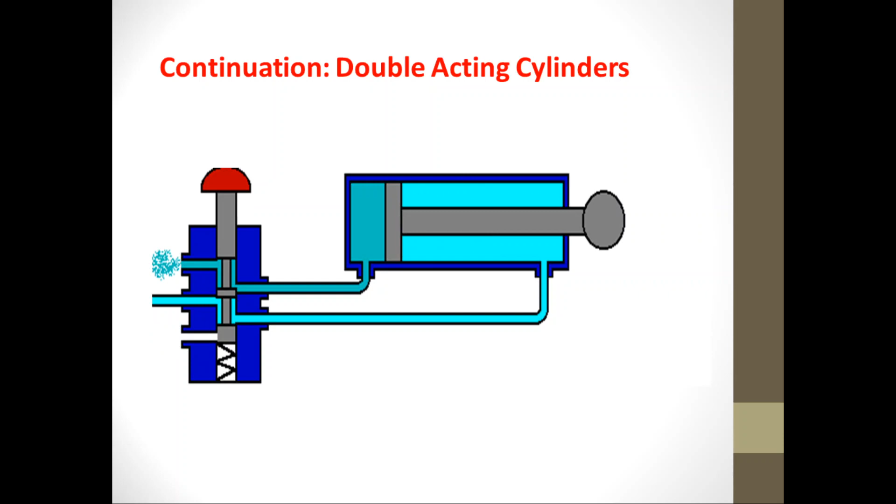Okay, so now for the double acting cylinders, this type of cylinder must be paired with what we so called five two-way solenoid valve. Five two-way solenoid valves are used to control the position of a double acting cylinder.

Take note, for single acting cylinder, it must be 3/2-way, sometimes read as 3-2-way. For the double acting cylinder, it must be paired with a 5 two-way solenoid valve. The number 5 indicates the number of ports, and 2 represents the number of positions the cylinder can attain. These positions are the extended position and the retracted position.

Now there are two types of 5 two-way solenoid valve. The first one is the single coil, or spring return, 5 two-way solenoid valve.

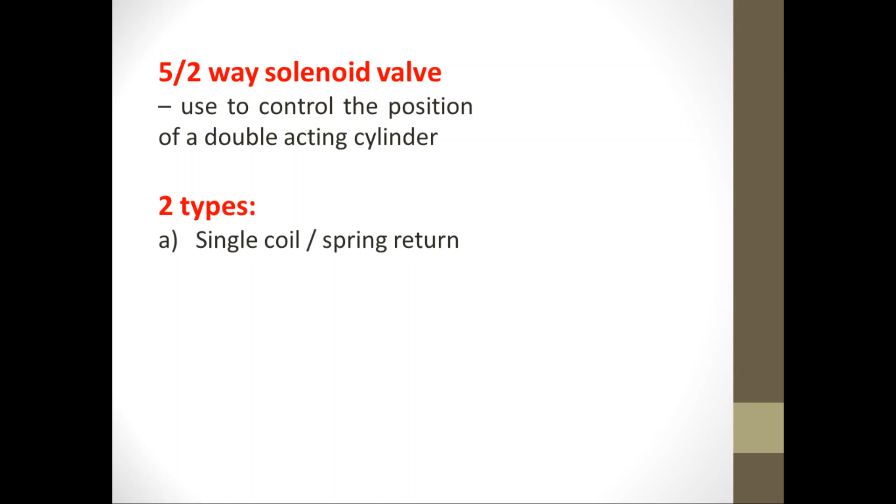This would be a typical actual example of the single coil 5 two-way solenoid valve. If you imagine the 3 two-way solenoid valve, it looks the same as the 5 two-way, except there are two service ports. If you look, there are two service ports here, and then you have one solenoid coil. That is why we term this one single coil, or spring return, 5 two-way solenoid valve.

The second type of 5 two-way solenoid valve is the double coil. As you can see, the difference between the two types is the number of coils. The first type is the single coil, so from the name itself there is only one coil. This is the part of the solenoid wherein we supply the voltage or electricity. Once the coil is supplied, it will activate the passage of air. Similarly, in the double coil 5 two-way solenoid valve, each coil must be activated for the air to be allowed to flow.

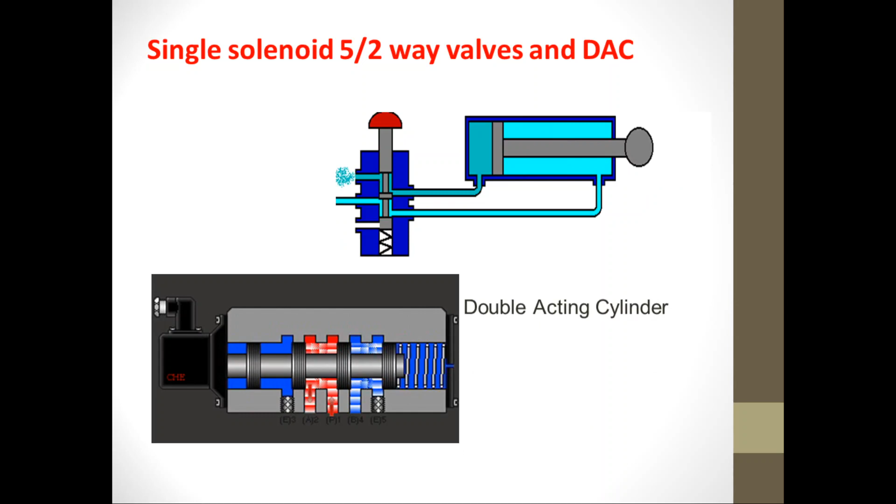So the next type of 5-way solenoid valve is the double coil. Before we go through the double coil, for the single solenoid, basically the operation of the solenoid is the movement of the plunger. The movement of the plunger actually dictates the direction of the airflow, coming from the compressor going to the pneumatic cylinders. So sometimes the solenoid valves are termed directional valves, since they dictate the direction of the pneumatic cylinders.

So single solenoid means that the way for the plunger to move back to its initial position is by means of a spring. Once the source is deactivated, the spring will push the plunger of the solenoid valve so that it is placed back in its original position.

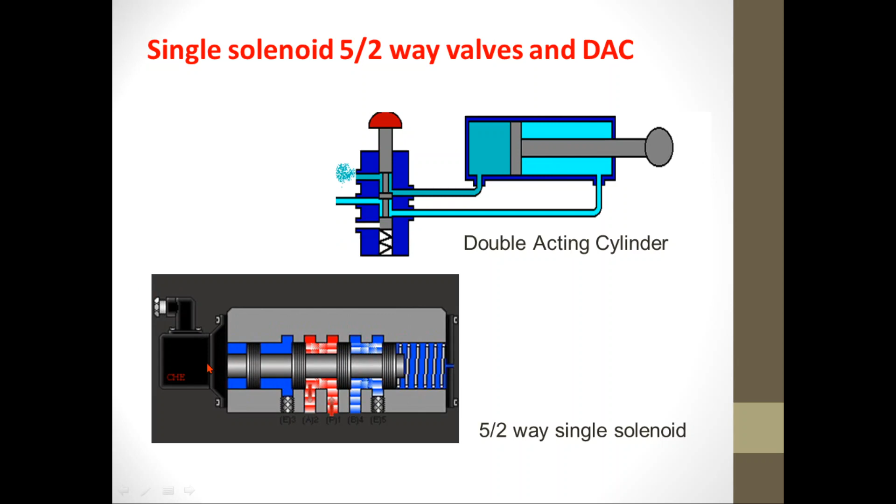For the single solenoid, if you want the cylinder to extend, you simply turn on or energize the coil of the solenoid valve. Once you energize this one, the double acting cylinder will extend. But if you turn off the solenoid coil, then the cylinder will retract.

Now for the double solenoid, to extend the double acting cylinder using a double coil 5-way solenoid valve, first you need to turn on the first coil, so the cylinder will extend.

Even if you turn this one off, take note, the double acting cylinder will not retract. Because the plunger does not return to its original position, the flow of air will still be in this direction, the red one. So to retract the double acting cylinder, you need to turn off this coil.

At the same time, you need to turn on the second coil. In the single solenoid, you just simply turn off the coil, and it is the spring that will push the plunger back to its original position.

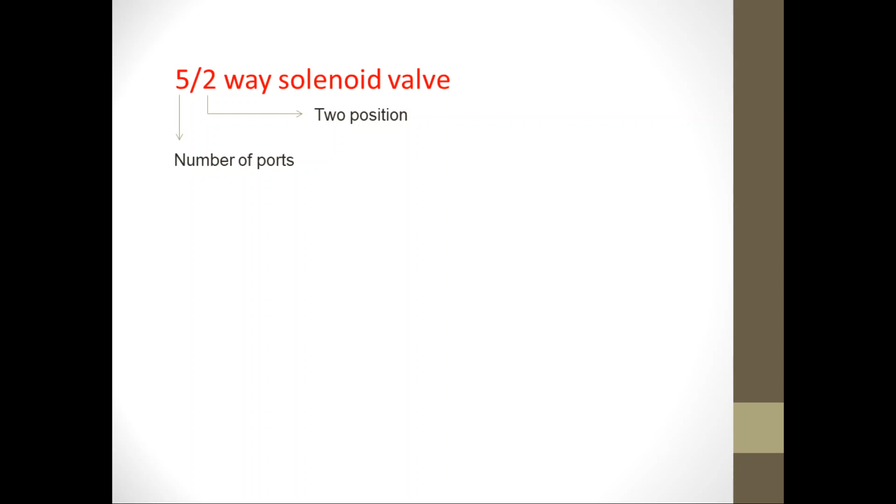So before we continue to the next topic, let's take a look at the configuration of the 5-way solenoid valve. The 5 represents the number of ports. The 2 represents the two positions that the 5-way valve can offer, either extended or retracted position. This would be the schematic diagram of the 5-way solenoid valve.

The first one is single coil, and the second one is double coil. For the single coil, you have one solenoid coil. For double solenoid, there are two solenoids.

You supply this one, then the cylinder will extend. You cut off or turn off the supply, then the cylinder will retract. In this case, you turn on this coil, the cylinder will extend, and then you turn on this second coil, and the cylinder will retract.

Now the fourth one, numbered 1 represents the inlet port. This is the port in the solenoid valves wherein you inject the air pressure coming from the compressor, and then ports 3 and 5 represent the exhaust port.

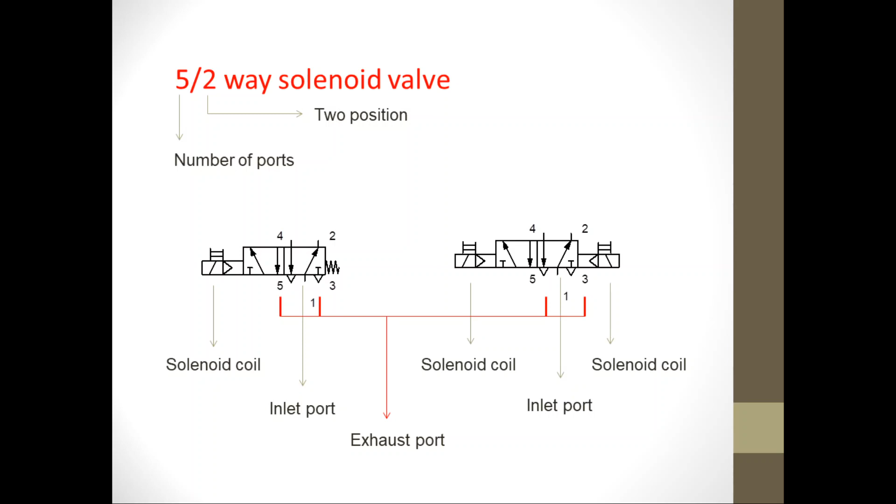Okay, so this would be the port wherein the air coming from the other side of the double acting cylinder will be exhausted. Okay, so ports 4 and 2 are the service ports. So this is where the double acting cylinder will be connected.

Port 4 is the exit point of air coming from the solenoid valve to push the double acting cylinder into its extended position. Port 2 is the exit point of the 5-way solenoid valve for the double acting cylinder to return to its retracted position.

Okay, so as you can see, there are 5 ports: one inlet, 2 service ports, and 2 exhaust ports. For the 3/2-way valve, if you remember, 3 represents the number of ports: one inlet, one service, and one exhaust.

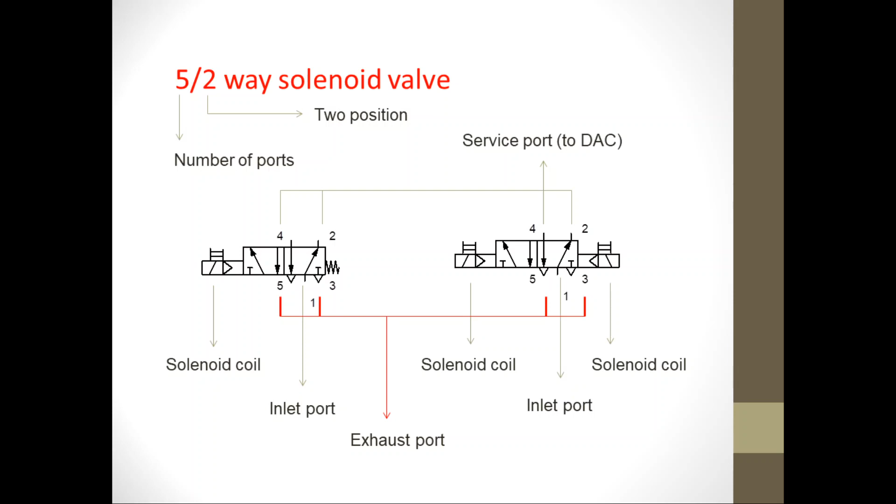Okay, so now the next topic would be the proximity sensors. So how important are the proximity sensors? The proximity sensors are employed in an electropneumatic system, and they detect the position of the cylinder, whether it is in extended or retracted position.

Okay, so take note, one cannot know whether the cylinder is in extended or retracted position, particularly if the cylinder cannot be seen by direct visual observation, wherein the naked eye of the operator cannot see directly the position of the cylinders, whether single acting or double acting.

So we'll be using 2 types of proximity sensors. The first one is the reed switch. The reed switch is an electrical switch, and its application is done through the use of magnetism. The second type of proximity sensor is the limit switch. Limit switches may change contact only if they detect the mechanical presence of the pneumatic cylinders.

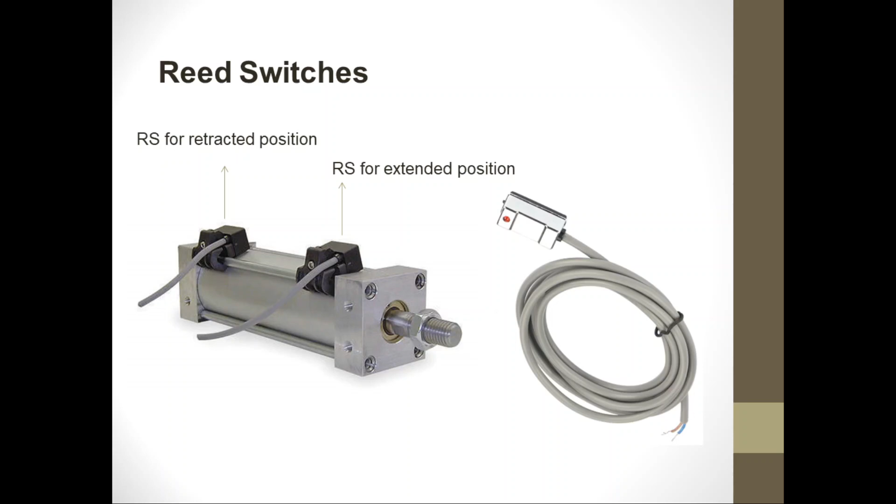so before we continue, this would be the positioning of the proximity sensors. Okay, so the limit switch must be installed outside the pneumatic cylinder, wherein you have to see to it that the limit switch can be hit. When the cylinder extends, it will create a mechanical contact with limit switch 1, and when it is in retracted position, it will create a mechanical contact with LS2.

So the proximity sensor or the reed switch must be installed in the body, wherein the base of the piston rod must be of magnetic material. For the limit switch, the base of the piston rod may not be of magnetic material. For the reed switch, the base of the piston rod must be of magnetic material because it will be detected by the reed switch.

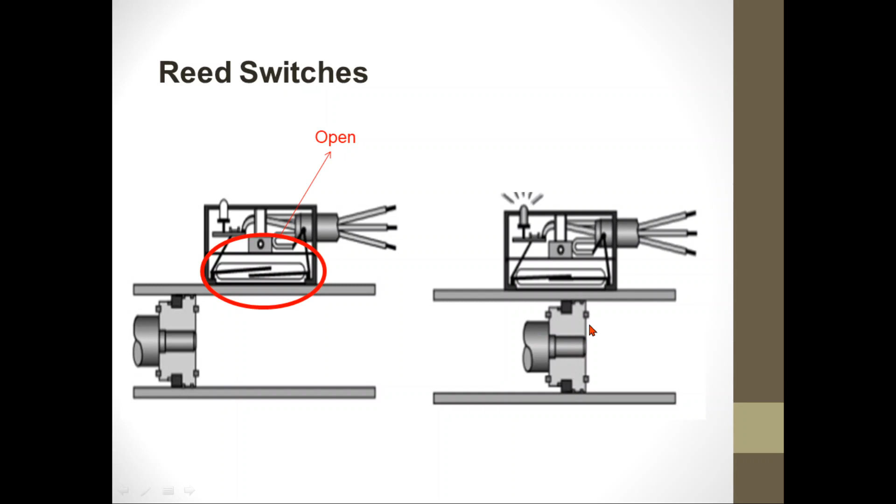Okay, so now if you look at this point, the reed switch is actually open. But when the base of the piston rod is under the reed switch, since it has a magnet, the black one, it will pull this contact, thereby creating a closed contact in the switch.

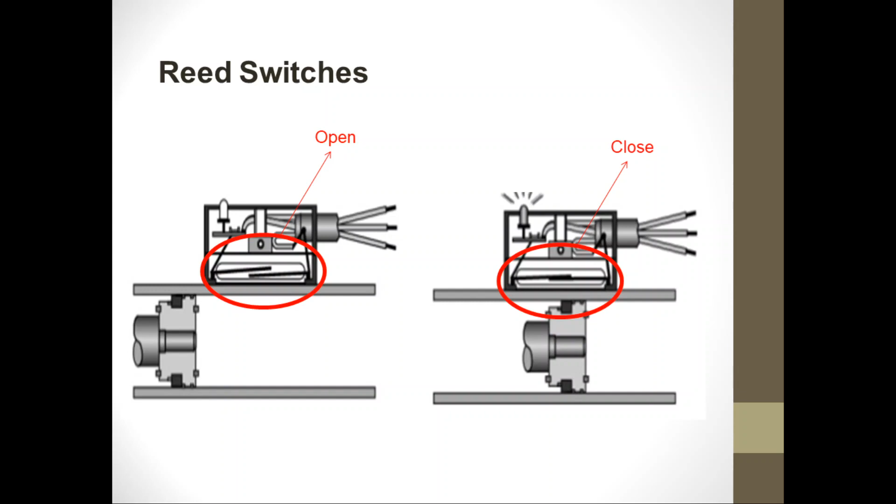To better understand the topic, let's go to the simulation software, and then we'll try an example for the double acting cylinders together with the 5-way solenoid valves. Assuming that you have already downloaded the software, you can go to the downloaded software.

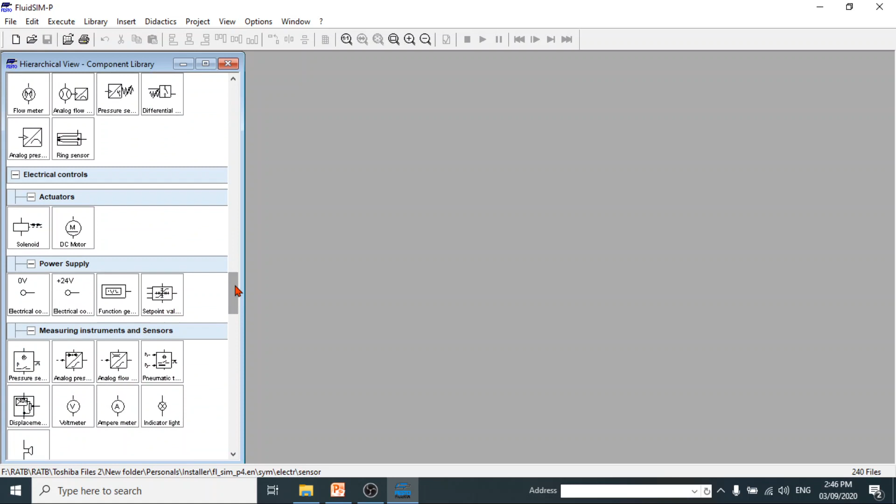Okay, assuming that you have already extracted the FluidSIM software, again, to run it, you open the folder, go to bin, and double click the application icon. Okay, and then you'll be directed to this new window. Again, these are the component libraries that may be of use for electropneumatic simulation. Again, not all of these components will be used.

Okay, so we'll just pick some that may be useful, particularly in the simulation of our laboratory exercises. So to begin with, we can click this icon to create a new working environment or working area. You'll be given this new tab. Let's close the other one. So this will be the working area.

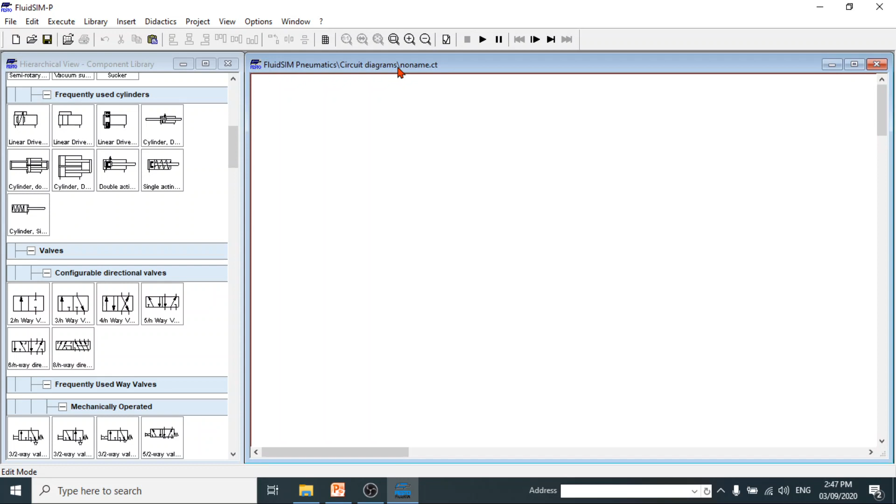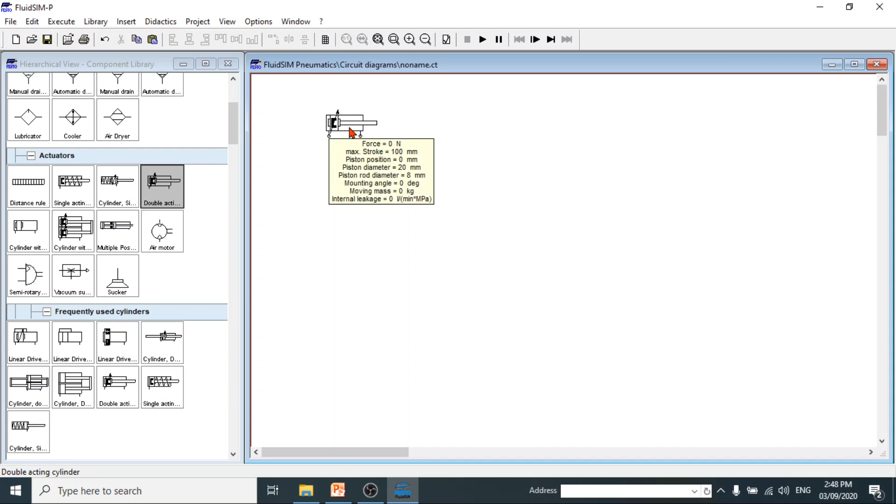Now to illustrate again the principle of a double acting cylinder, we first pick in the actuator side. You click double acting cylinder, and then drag it to the working area. Then first we need to find the appropriate solenoid valve for the double acting cylinder. So we have here the 5-way solenoid valve. This is for the single solenoid or single coil.

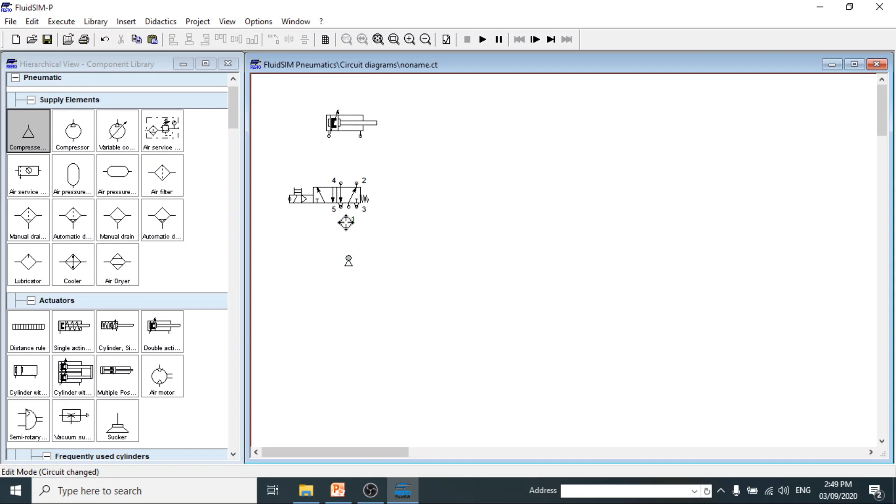And then the compressor, which can be found in the supply elements. So click and then drag. The compressor will be connected to the inlet port, which is port number 1. The service ports will be connected to the double acting cylinder. So just click 2 to this point and 4 to this point. So this is now the pneumatic circuit using the double acting cylinder.

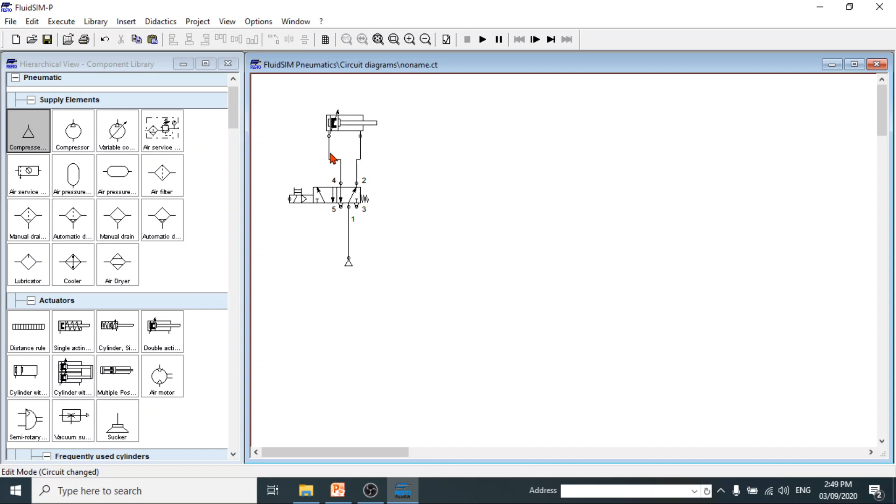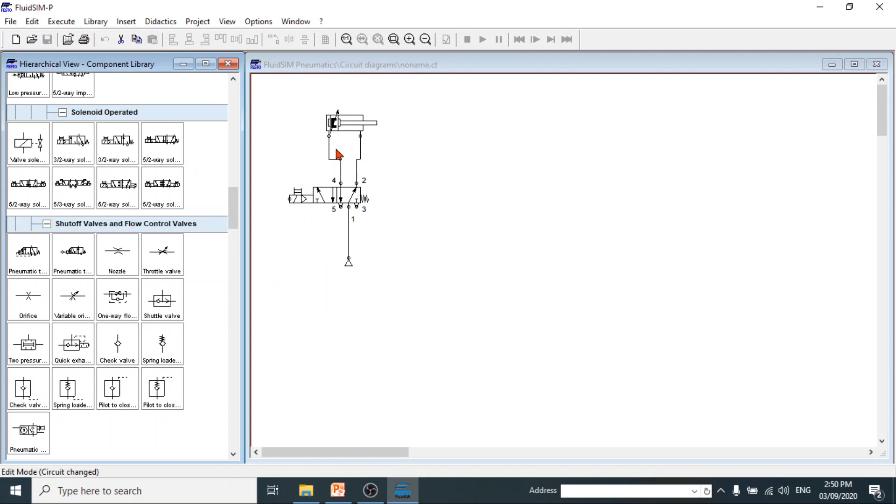By the way, we can add in the shut off valves and flow control valves. So we can add the throttle valve. This is used to adjust the airflow, the flow rate of the air coming from the compressor going to the pneumatic cylinder. So again, click, and then you click this one, and you can rotate it by 90 degrees.

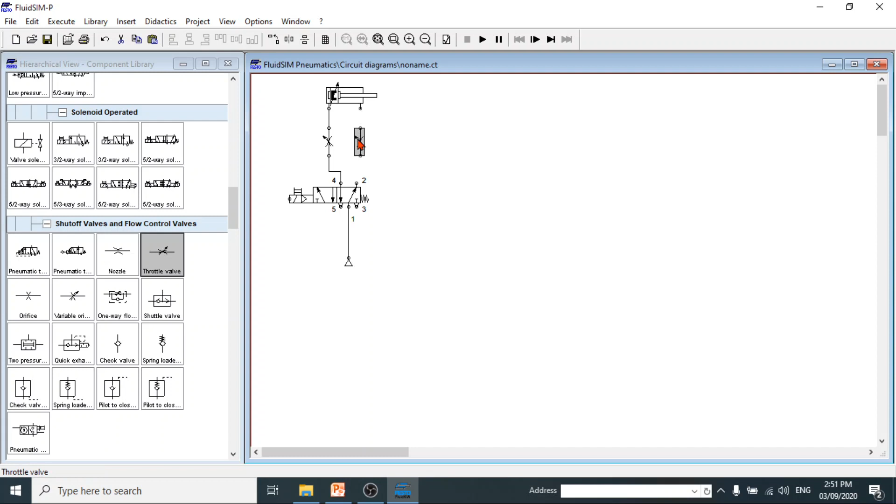You can insert it in between the valve and the cylinder. So you click this line, delete, and then insert. Then you can copy: just press Ctrl C, then Ctrl V, and you will have the flow control valve. Again, the purpose of the flow control valve is to adjust the flow rate of the incoming air from the solenoid valve going to the cylinder.

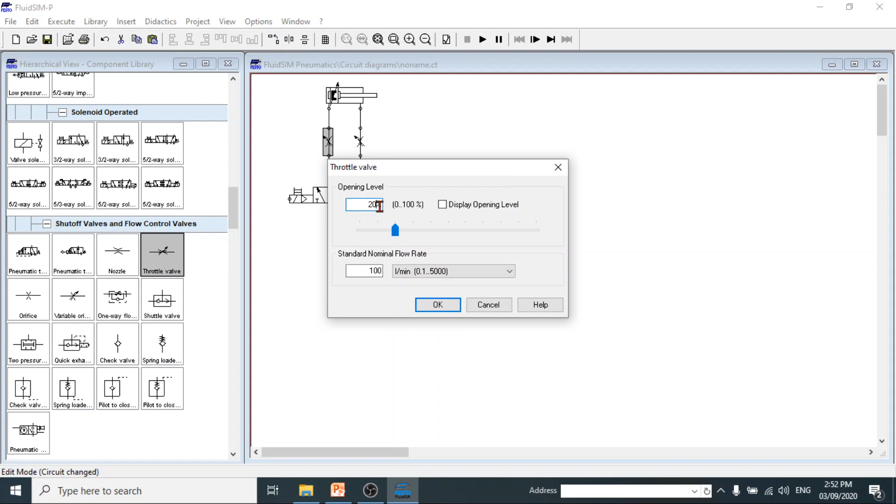To adjust it, you can double click, and then you can adjust the opening in terms of percentage, like 50%, 10%, or 20%. 100% means that the valve is fully open. You can imagine the throttle valve as similar to a faucet. When you open the knob, the outgoing flow of water will be very high. You adjust the opening of the faucet by turning the knob. Similarly in the throttle valve, you can adjust the opening to regulate the flow of air.

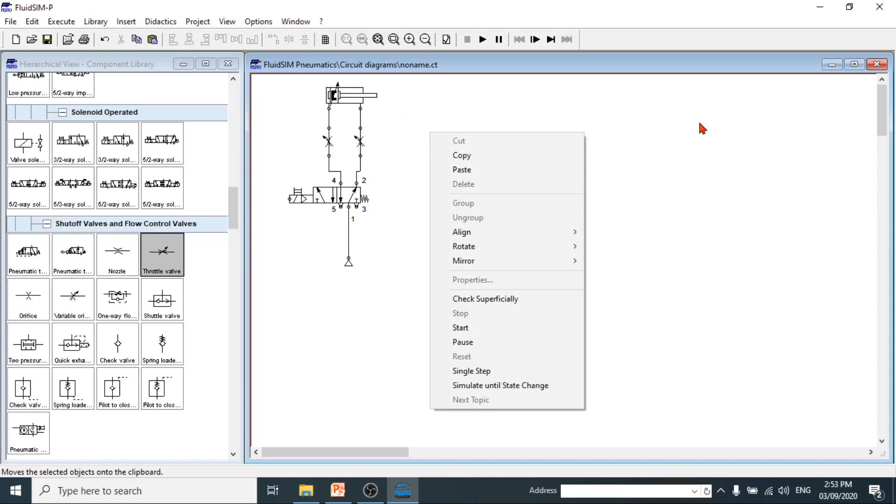As mentioned in the lecture from the previous slides, the main advantage of the double acting cylinder compared to the single acting cylinder is that in a single acting cylinder you can only adjust one speed of the cylinder, because you cannot adjust the speed the other way since it is mandated by the spring. In the double acting cylinder, you can adjust the airflow to increase or decrease the extension and retraction speed.

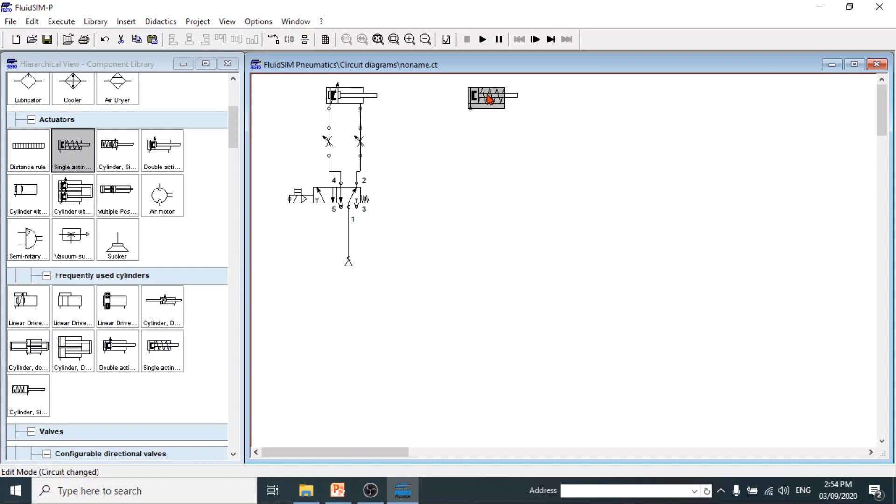To illustrate, let's build again the pneumatic circuit for the single acting cylinder. You click this one, and then we'll try to compare. Then you have the flow control valve; you go to the flow control valves, or you can copy this one. You double click, and you can check display opening level. Let's have it 20% for example. You may also hide the opening level.

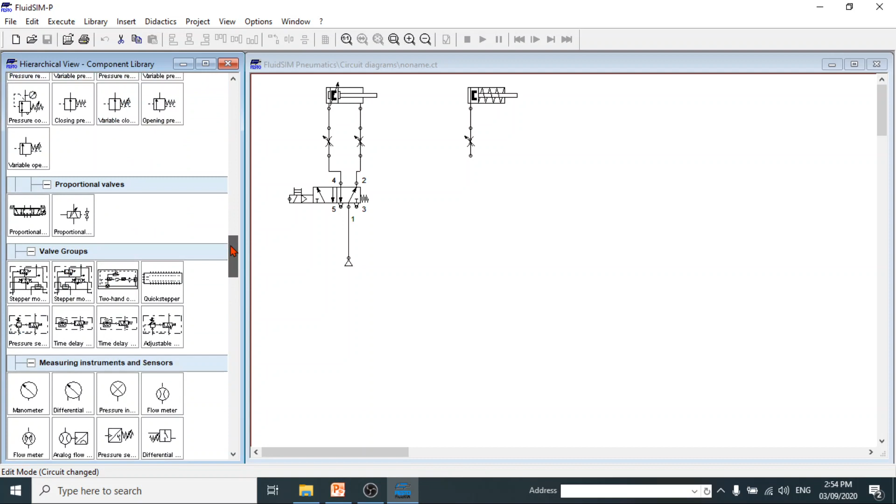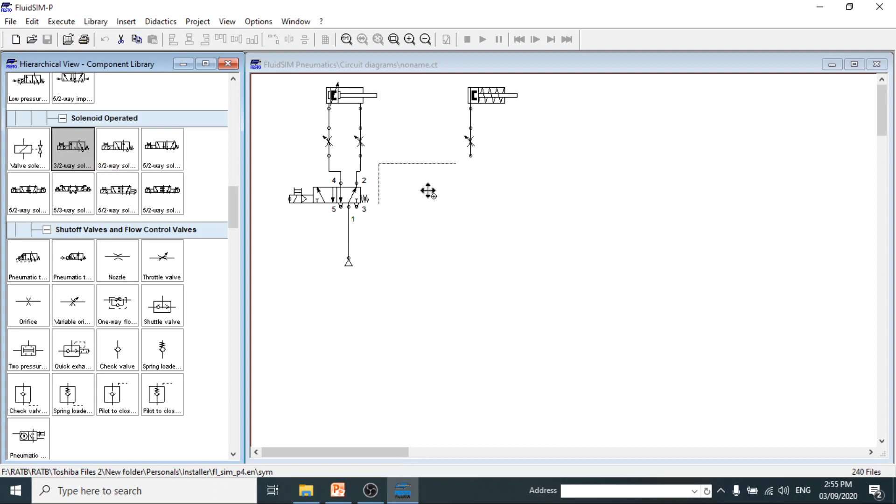Connect it to the cylinder, and then we need to find the solenoid valve intended for the single acting cylinder. You can click this one, three two-way. Not this one but the other one. Okay, I think this would be the three two-way valve.

So again, let's try to examine the difference between the double acting cylinder and single acting cylinder. You can have a common compressor for the two cylinders. So to name the solenoid coil, you can double click this part. This one, we can name it Y1 for the three two-way valve, and then we can name it Y2 for the five two-way solenoid valve.

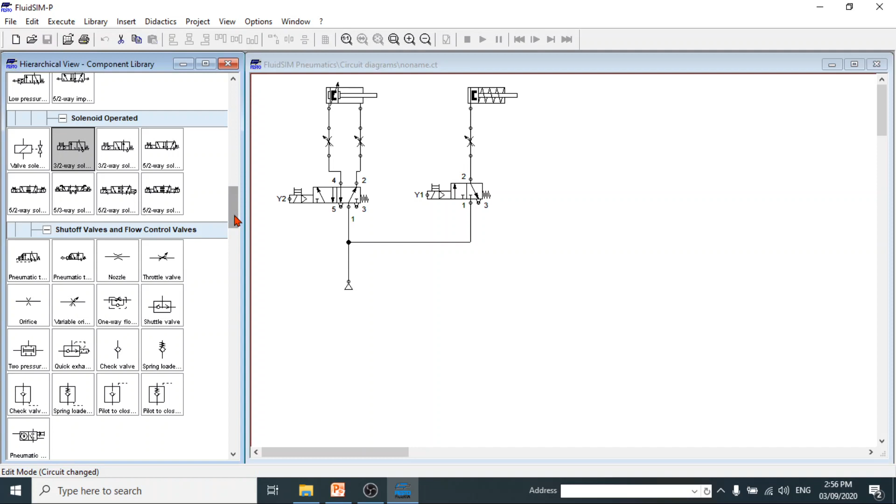So now, let's try to simulate first the double acting cylinder. Remember that for the double acting cylinder to extend, the solenoid coil of the five two-way solenoid valve must be energized. Meaning to say, Y2 must be supplied with the rated voltage. In our previous example, we were using the NEMA format. In this example, we can use the other type of ladder circuit, which is the IEC.

So for IEC, you can start with the 24 volts. Positive, you can place it there, and then the negative or zero, you can place it here. To take note, for the double acting cylinder to extend, Y2 must be energized with the rated voltage. When you say energized, this must be supplied with the rated voltage, which is 24 volts DC. The word energized means that you give the rated voltage.

Again, from your electrical circuit subject, when you say voltage, you must have the two terminals connected to the source. One terminal must be connected to the positive, one terminal to the negative. So the coil must be connected to the positive terminal, and the other end to the negative terminal. To use the IEC format, you need to go to the valve solenoid, put it here, then double click and label it Y2.

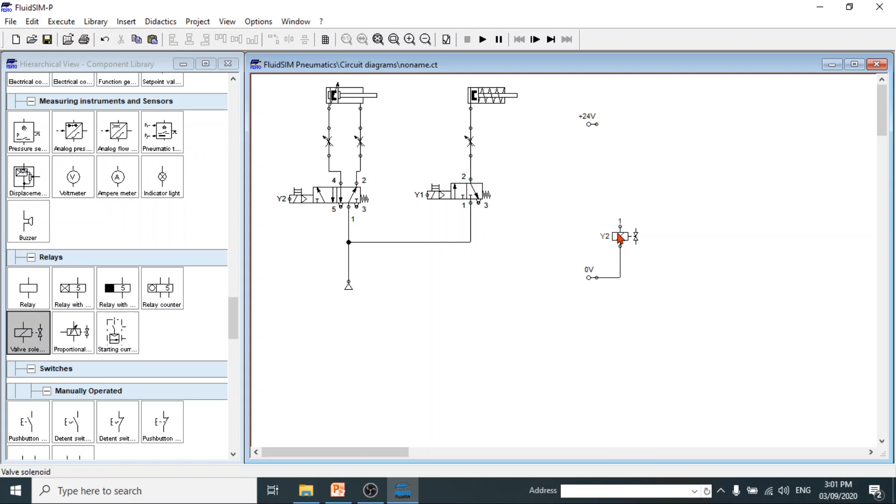This means that this is the coil for this 5 two-way solenoid valve. Again, in order for the double acting cylinder to extend, the coil of the single solenoid 5 two-way valve, or basically Y2, must be energized, connected to the positive and to negative. But if we connect it directly to the positive, just like that, when we simulate, the double acting cylinder directly extends.

To avoid that, we must insert something commanded by the operator, which is the switch. We insert the normally open push button such that when the operator presses the push button, the coil Y2 will be connected to the power supply. We delete this one. To choose the push button, click the manually operated switches, push button make, and drag it to the working area. This must be connected in series with the solenoid Y2, connected to point 2.

When we press the push button, this will create a contact, connecting this terminal to the positive terminal of the 24-volt supply. We simulate and click the push button. So long as the solenoid Y2 is connected to the source, the cylinder will always extend. If we release the push button, you notice the coil Y2 is now de-energized, or turned off, and the cylinder retracts to its initial position.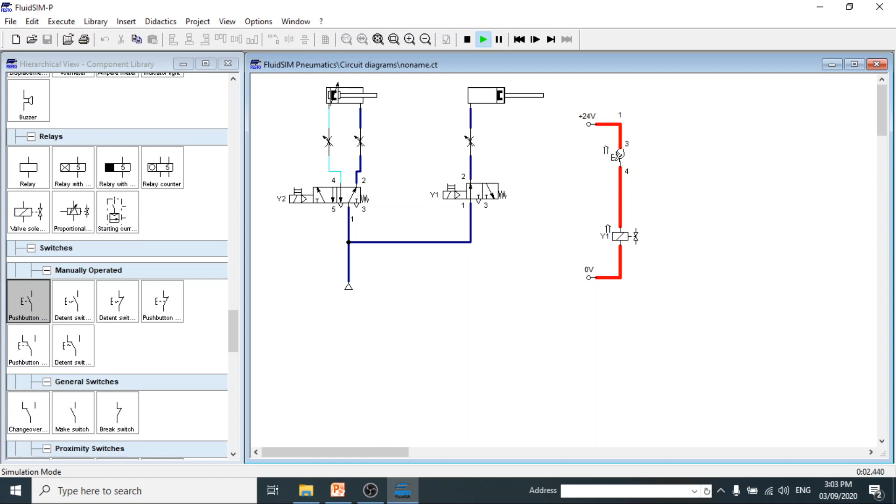If we look at the difference between the operation of the double acting cylinder and the single acting cylinder, we can label this one Y1. Meaning to say, we will be energizing next the three two-way solenoid coil. If we turn on Y1, the single acting cylinder extends. If we release the push button, the single acting cylinder retracts.

Okay, so it extends, and when you turn it off, it retracts. So in the same way, we stop the simulation first. Okay, so if we label this one Y2, meaning to say it will be energizing the Y2 coil of the 5/2-way solenoid. We can energize, okay, on and off, on and off.

And then if we try to label this one Y1 again, so this is for you to have a better understanding of how the 3/2-way valve and 5/2-way single solenoid valve have a similarity in the operation. Okay, try to click. So then on, off, on, and off. So you notice that the setup, the double acting cylinder together with the single solenoid 5/2-way valve, will have the same output as the single acting cylinder that uses the 3/2-way valve.

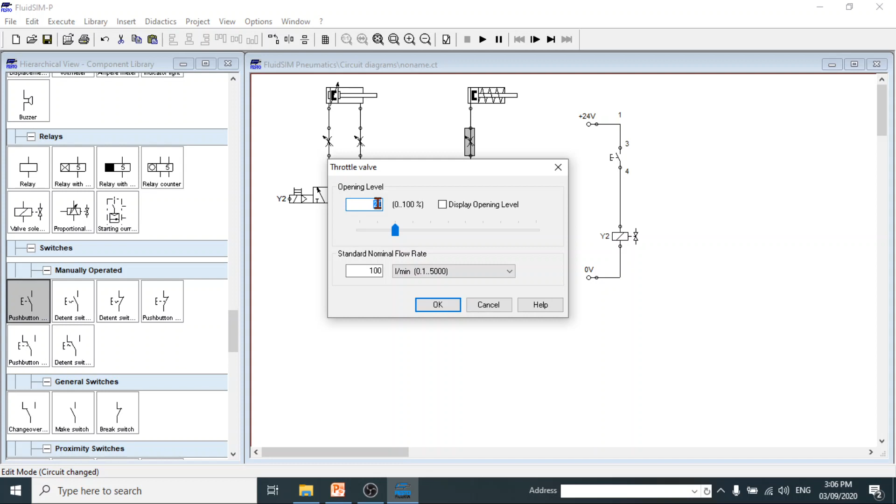However, in the single acting cylinder you can only adjust the speed in one direction. So assuming that we change this one to 5%, and then we label this one Y1, once we energize, you notice the speed of the single acting cylinder in the extended direction hasn't changed, but you can change the speed in retraction of the cylinder.

So the objective of this simulation is to present to you the similarity between the double acting cylinder using the 5/2-way single solenoid valve and a single acting cylinder which uses the 3/2-way solenoid valve. So meaning to say if you have a single acting cylinder together with a 3/2-way valve, you can replace the whole pneumatic circuit with a double acting cylinder using a 5/2-way single solenoid valve. So with the same control circuit, you can have the same output. So again, the advantage is that you can adjust the speed in both extended and retracted direction using the double acting cylinder.

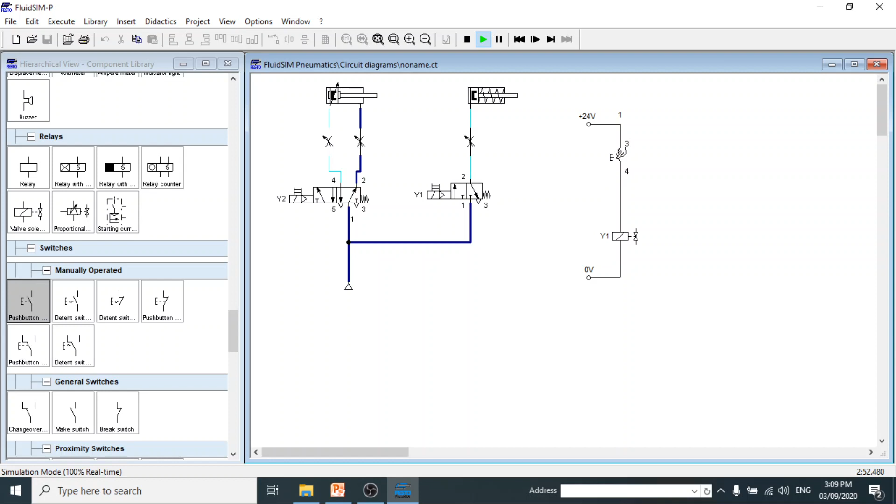However, in both pneumatic setups, it is a must that the control circuit has what we call a latching contact, since when you release the push button, even if the cylinder does not reach the fully extended position, it will return to its initial position. Okay, so we can delete this one. We'll focus the discussion on the double acting cylinder.

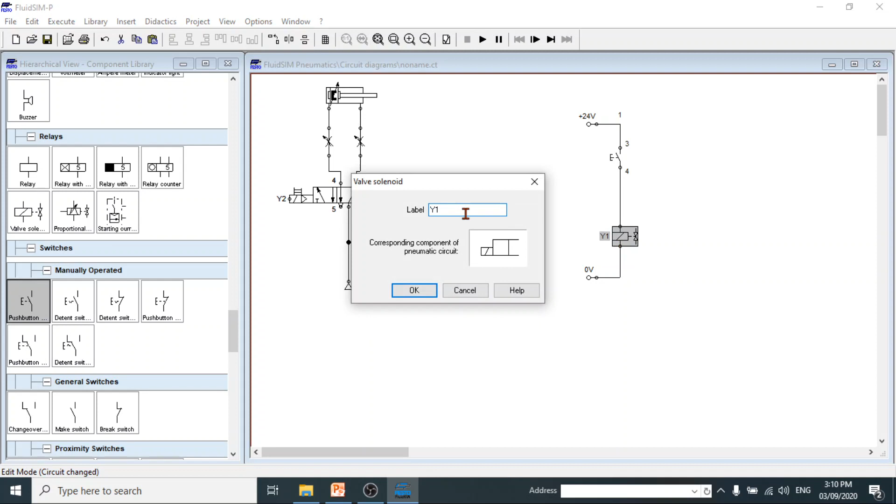Okay, so now this would be Y2. So again, if we try to simulate, you click and then release. For example, you click and you suddenly release. So the cylinder automatically retracts even if it hasn't reached the fully extended position. So in order for the cylinder to reach the fully extended position, even if the push button is released, we need to have the latching contact, which is actually provided by the relay.

So take note, the solenoid coil cannot offer auxiliary contacts. So in order for you to have the auxiliary contacts, you need to have the relay. So to provide a relay, we go to the relays. So this would be the relay coils in IEC format. The direction of the ladder in the IEC format is from top to bottom, whereas in NEMA, it's from left to right. So last time we were using the NEMA format, this time we'll be using the IEC format.

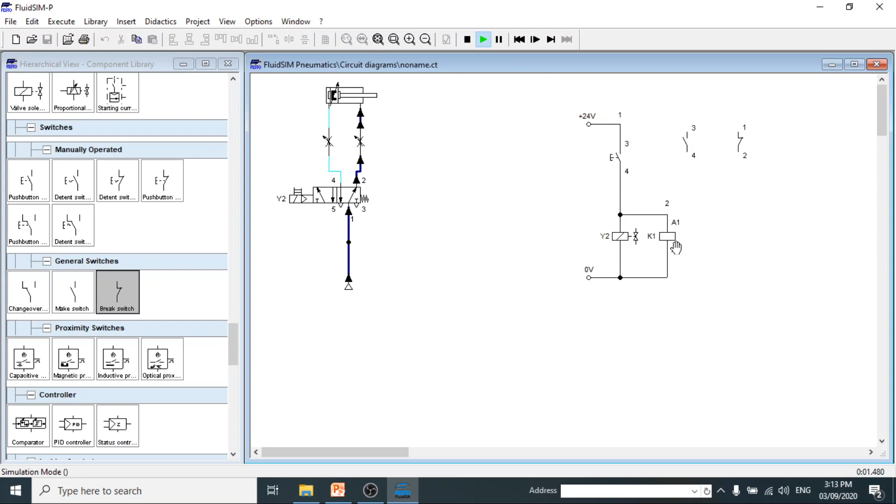Again, to remind you of the operation of a relay, if you try to simulate, focus your attention here. Before this, we can label this one as K1, and this one as K2. These serve as the relay contacts. The format or symbol using IEC format will remain the same.

So for the relay, K1, sorry, this is K1. You notice that we have open and close contacts. When you simulate, when you energize K1, this becomes closed and this becomes open. Focus your attention on these contacts. When we energize Y2, since K1 is connected in parallel to Y2, these contacts must change position.

You can start by clicking. You notice that the open becomes closed and the close becomes open.

So to start with, to have the latching contact, we can make use of the normally open auxiliary contact of a relay, connected in parallel with the push button.

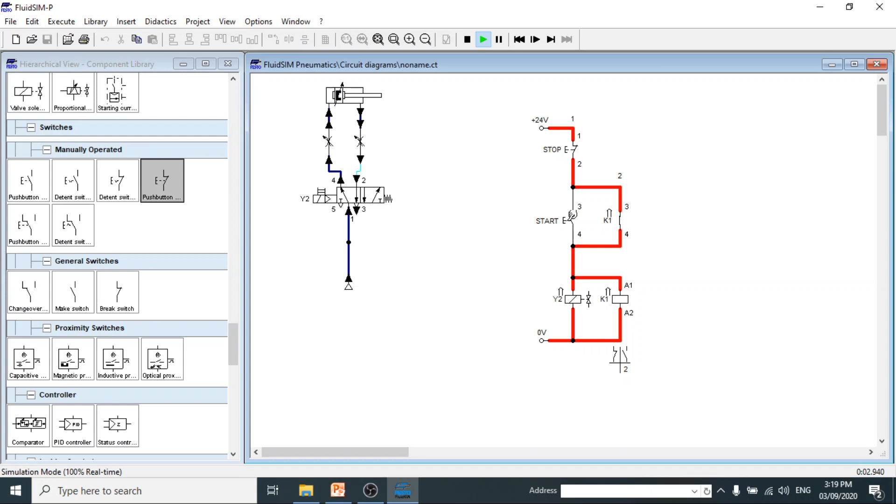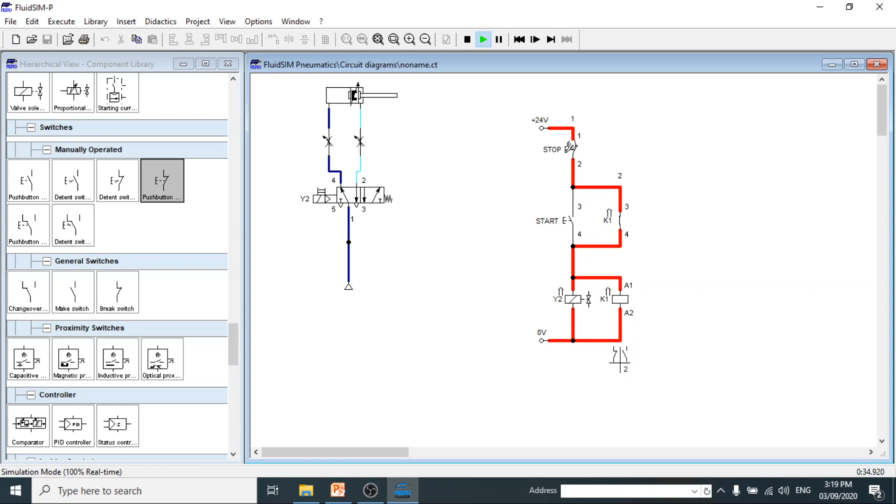And then we try to simulate again. You can click start, and the cylinder extends. For the cylinder to retract, the only way is to de-energize Y2, which means we need to turn off the supply for Y2. That can be done by pressing the stop push button. If we try to press it, Y2 is de-energized, and the cylinder now returns to its original position, which is the retracted position.

That's how we extend and retract a double acting cylinder using a single solenoid 5-way valve. Now let's move to the double solenoid. So we stop the simulation.

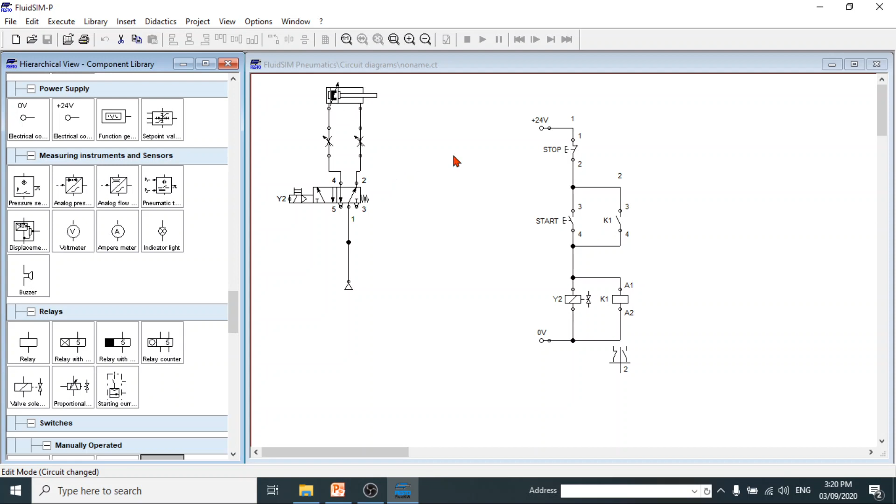Again, you can build the equivalent circuit of the control circuit using the IEC or the NEMA format. For NEMA, everything can be found under the ladder symbols. Whereas for IEC, you have a lot of tabs to be used: the relay, the switches, the general switches, and so on. So in the design process, it's up to you whether you use NEMA or the IEC format. The good thing is that once you understand the IEC and NEMA format, you will be more flexible when you go outside CIT, like when you will be working in any industries, because there are industries that follow IEC format, and then there are also industries that follow NEMA.

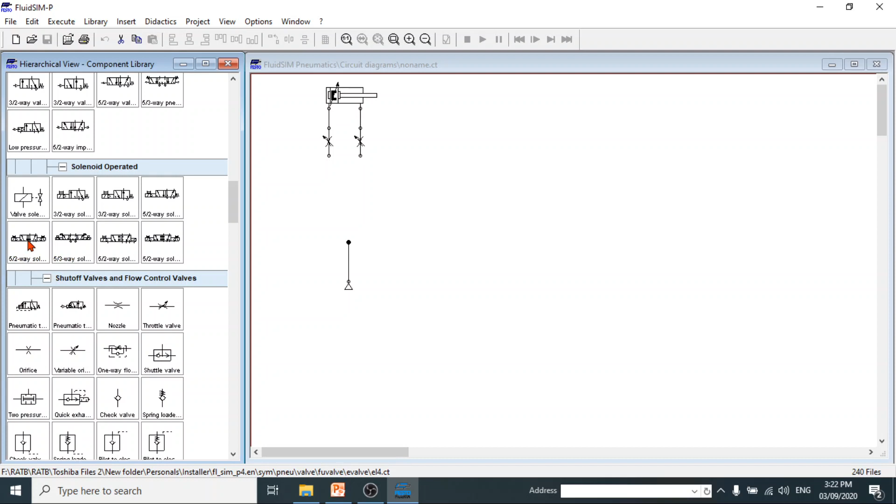So we try to delete this one, and then we try to make use of the double solenoid. So we delete this one. For double solenoid, we use under solenoid operated, click the 5 two-way solenoid impulse valve. Click and then drag. This time you notice that there are two solenoid coils present, this one and this one. You can double click, we can name this one Y1 and then we can name the other one Y2.

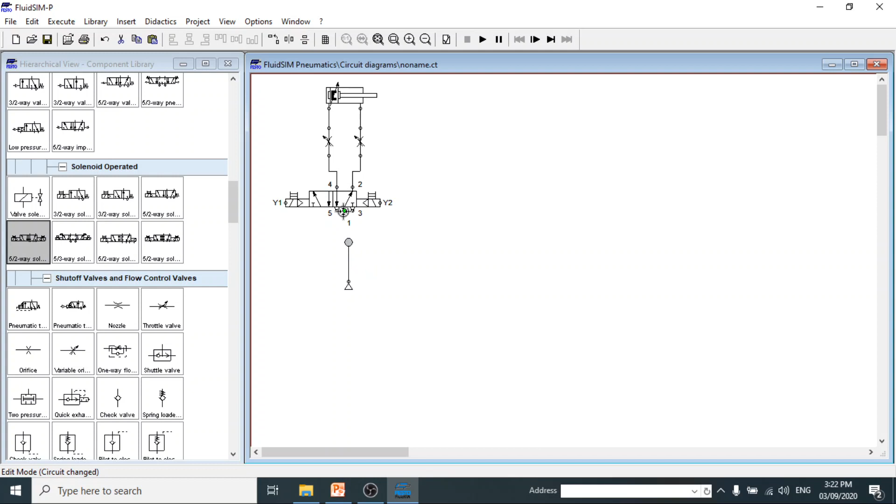The same thing, the ports will be connected: port 4 will be connected to this port of the double acting cylinder, port 2 will be connected to this other port also of the double acting cylinder, and the compressor will be connected to the inlet port of the 5 two-way solenoid valve. So you have the Y1 and Y2.

Let's now have the control circuit for the double acting cylinder using 5 two-way, double solenoid valve. From the discussion, we found out that for the cylinder to extend, for the double acting cylinder to extend, the coil of this double acting cylinder must be energized. Let's try to create the control circuit for the double acting cylinder using double solenoid 5 two-way valve.

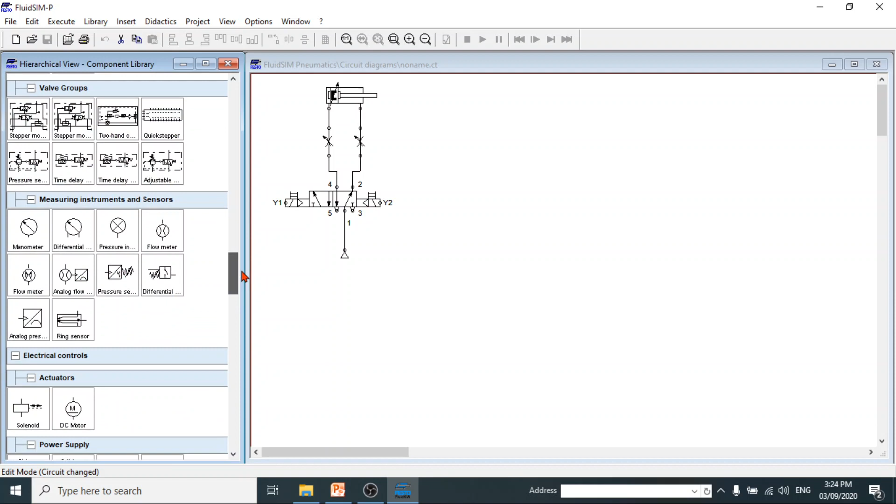This time again we'll use the NEMA format. You have there for NEMA in the ladder symbols. Click positive first, this would be positive, and then the negative. Again, for the cylinder to extend, Y1 must be energized. When you say energized, Y1 must be connected to the source.

The solenoid valve symbol using NEMA can be found here, and then you can drag it. Then you double click, and you can rename it Y1.

The same thing, we need a push button for the operator, for example, to control when to energize the coil Y1. So we can click start, or basically we can use extend, EXT. That means this push button is for the cylinder to extend. Click it, it must be connected in series. So it creates a contact. When you say normally open, it means make contact, that means once it is activated, it will create a connection.

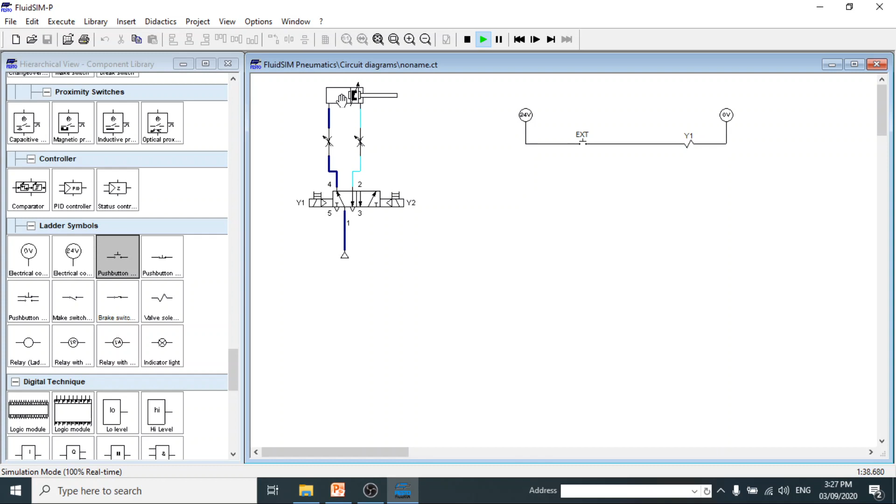Unlike with a double acting cylinder which uses a single solenoid 5-way valve, this is the main difference of the two valves. When using single solenoid, in order for the double acting cylinder to remain in its extended position, there must be the presence of the latching contact, in order for the solenoid coil to remain activated even if the push button is being released. For the double solenoid, even if we turn off the solenoid Y1, for example, the cylinder remains in extended position. So the only way for the cylinder to retract or to go back to its original position, you must need to energize this solenoid or the other solenoid, which is Y2.

So meaning to say, if Y2 is being activated, that would be the time the double acting cylinder retracts to its initial position. So when we use the double coil 5-way valve, there must be two solenoids in one circuit, and every coil must be connected in parallel. So the same setup with the same circuit, how do we construct the first circuit? That would be the same way we construct the next circuit for the retraction of the cylinder, so again everything must be connected in parallel.

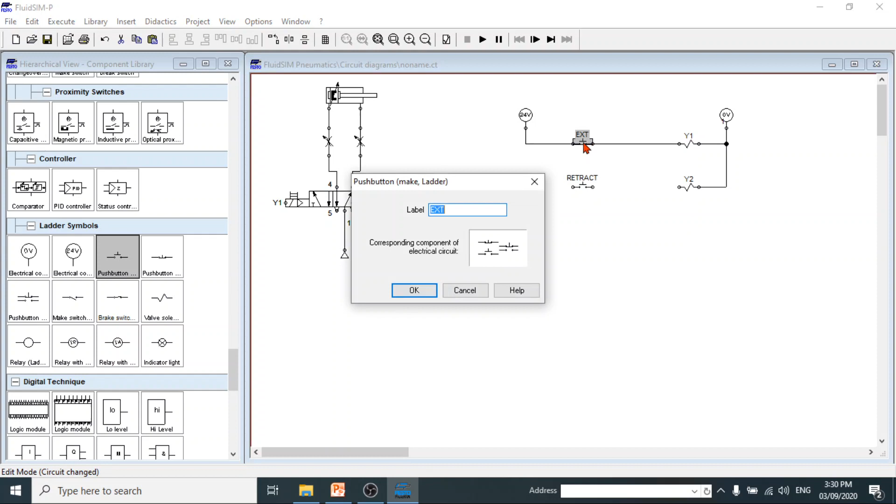So the solenoid coil Y2, double click again and type Y2, must be connected in parallel to the existing circuit. And then another push button must be connected in series with the coil Y2, so this should be retract. We can type retract, and this one would be extend. We can use the full word extend and retract. And then the push button, in the same way as with the first circuit, must be connected in series with the coil, and everything will be connected to the source.

Just like this one, we try to simulate. So we can extend the cylinder. The only way to retract is to press the other push button, which energizes Y2. When you say energize, it connects Y2 to the positive and negative. When we press this one, this terminal will be connected to the positive, and this terminal is already connected to the negative, so you can have retract. Extend and then retract.

If you try to spot the difference between the 5-way solenoid valves, the key difference is that in single solenoid, for the cylinder to extend, the solenoid must be turned on, and then the cylinder will extend. To retract, the coil of a single solenoid valve must be deactivated or de-energized, and automatically the double acting cylinder will retract. However, in the case of the 5 two-way double solenoid valve, to extend the cylinder we energize or turn on the solenoid coil, and to retract the cylinder it is a must that we energize the other coil. So for double coil 5 two-way valve, one coil is used to extend, and the other coil is used to retract the cylinder. That's the difference.

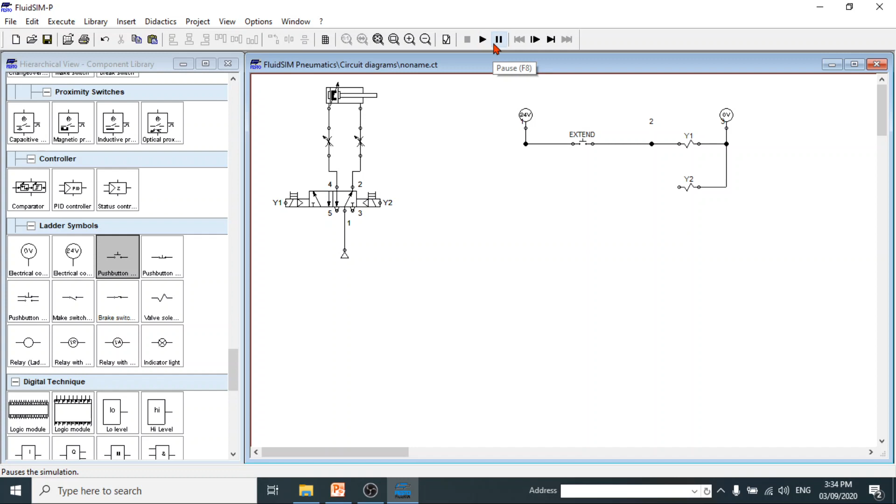So we try to eliminate this one. The next example, the next simulation will be for the application of proximity switches. Again, we're using the NEMA configuration, which follows left to right ladder circuit. In your activity, you can choose whether to use NEMA or IEC format.

So the next example is the application on proximity sensors, meaning the limit switch and the reed switch. We'll try to delete this one first, and then we'll try to build. We'll try to use the double acting cylinder, and in this example case we'll be using the IEC format.

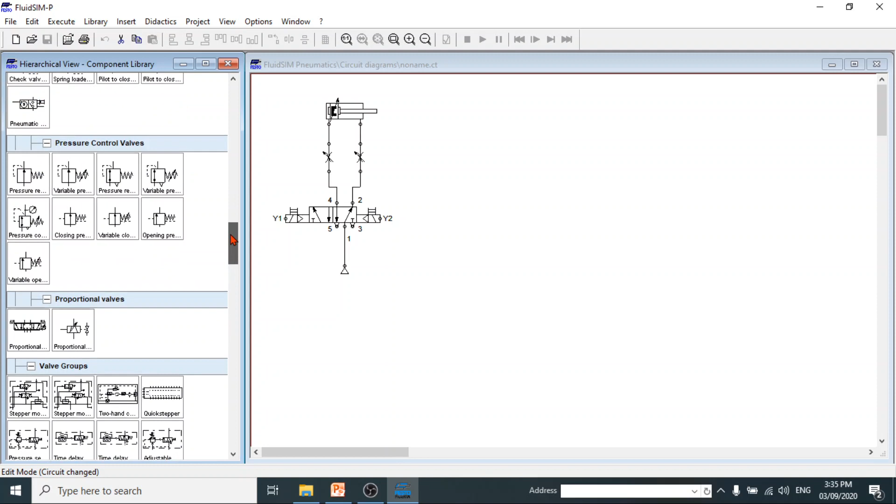Okay, so to add a sensor to the existing pneumatic circuit, we use, under the actuators tab, the distance rule. Okay, so this one, just click.

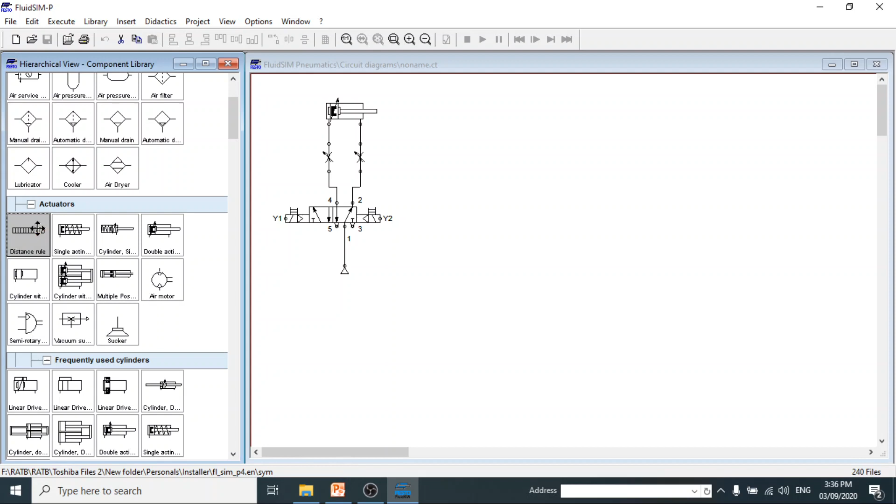If you want the sensor to function as a limit switch, you put the ruler at this position. But if you want to use the sensor as a reed switch, then it must be located in the body of the cylinder like this one. So this is for reed switch, and this should be for limit switch.

So take note, the operating principle of a limit switch is to create contact with the piston rod, whereas the reed switch works with the magnetism principle. That is why we put it in the body of the cylinder, just like this one. So reed switch, and this would be for limit switch. Again, you use the distance rule.

Okay, so now, to start with the sensor, we need to first find the parameters of the cylinder. We can double click the cylinder and then go to parameters. We'll look at the maximum distance that the cylinder can extend. By default, your cylinder can extend up to 100 mm, basically 10 cm. So this would be the maximum distance that the cylinder can extend.

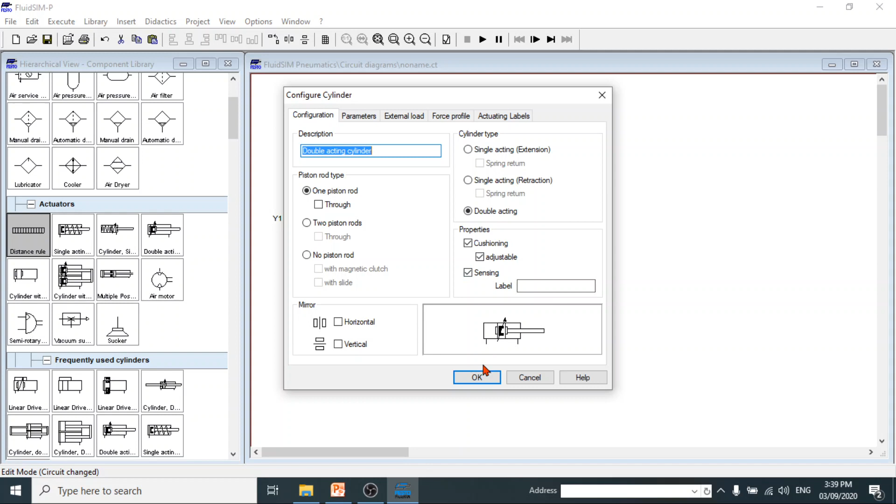Okay, let us troubleshoot first. We can delete this one. So again, double acting cylinder, and then the distance rule. Okay, so I'll be using the limit switch.

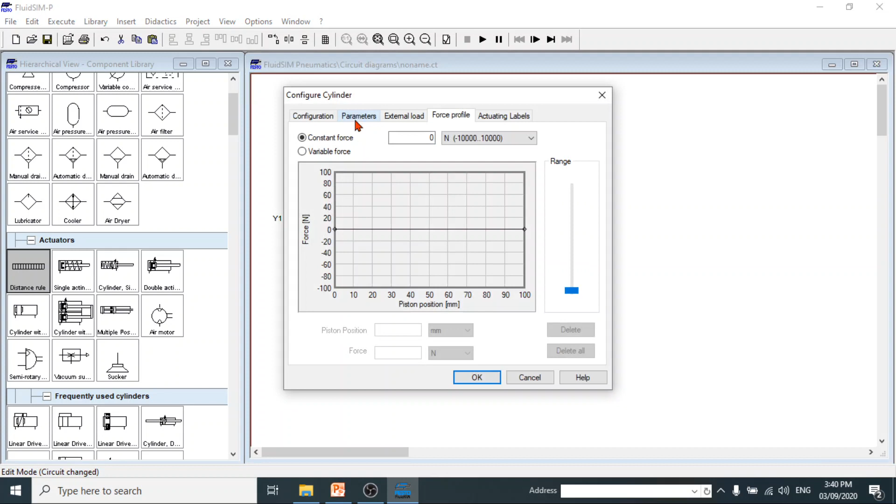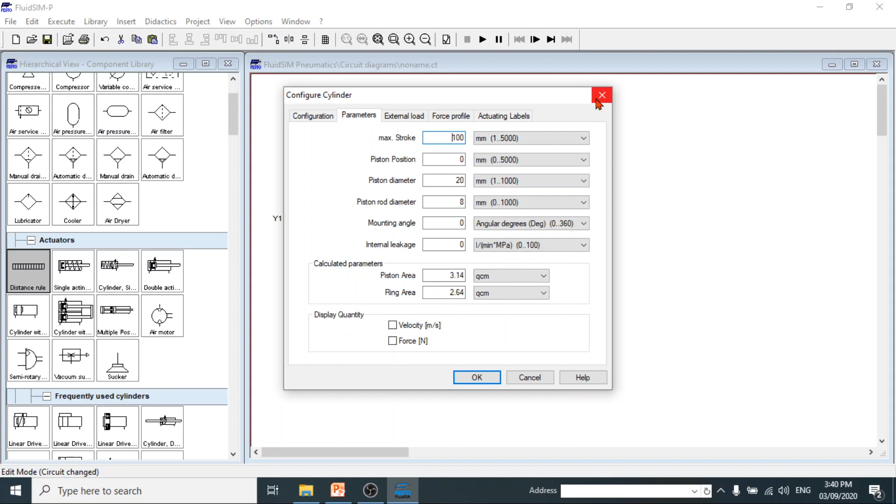So again, we look at the parameters. The maximum stroke refers to the maximum distance that the cylinder can extend. Again, by default, that's 100 mm or 10 cm. So let's leave it as is. For the distance rule, you double click this one.

We label the sensor or limit switch for the retracted position as S1, and the limit switch for the extended position as S2. To do that, we double click the ruler. Type S1, begin with 0 and end with 5. This means that the width of the sensor is 5 mm. And then we label S2, begin with 96 and end with 100.

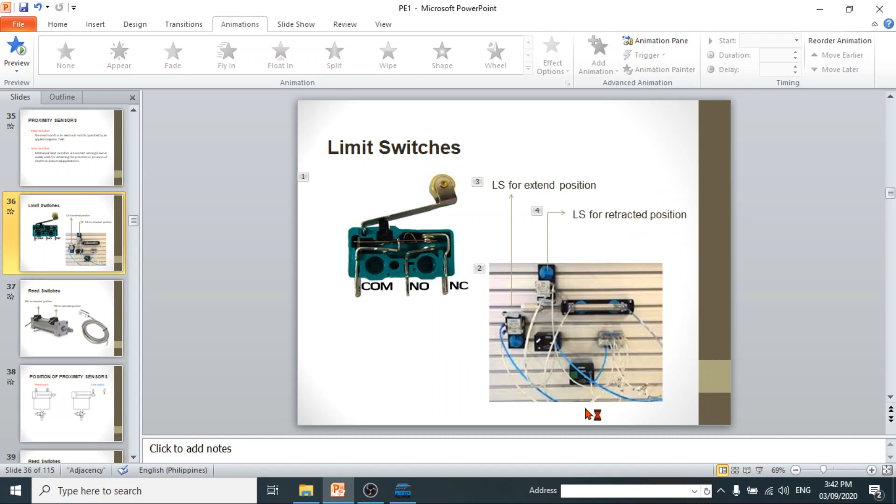So what is meant by 0 to 5 and 96 to 100? That's actually 5 mm length, from 0 to 5 and 96 to 100. That means the width of the limit switch is 5 mm. If we go back to the limit switch, 0 means this part here. It's situated at 0, and the end part of the limit switch is 5.

The limit switch must be situated at the farthest point the cylinder can reach, and also a limit switch is situated at the nearest point where the cylinder retracts. That's why we have 0 to 5. That means the limit switch is situated at the nearest point, the starting point of the cylinder, and 5 is the width.

And for the 96 to 100, the farthest point, this one, is situated at the 100 mm mark, because the cylinder can extend up to 100 mm, and since the width is 5 mm, it will start at the 96 mm count. So that's how the ruler works. So you have sensor 1, S1, and sensor 2, S2.

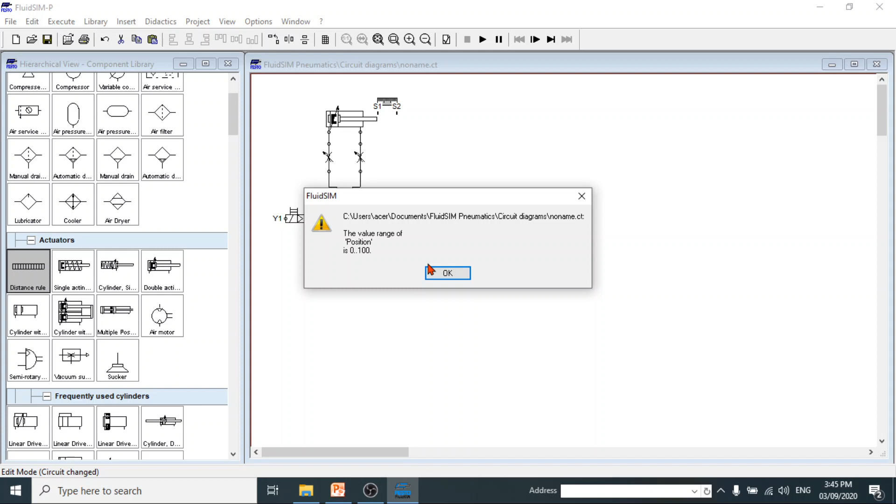So the software will prompt you that the range of the cylinder is up to 100 mm only. Okay, so that means that the position of sensor 2 is way too far from the maximum distance that the cylinder can reach. Okay, so that is why we'll have 96 to 100. So by the way, the width of the sensor is dictated by you. So you may have 0 to 3, and then you may have 97 to 100.

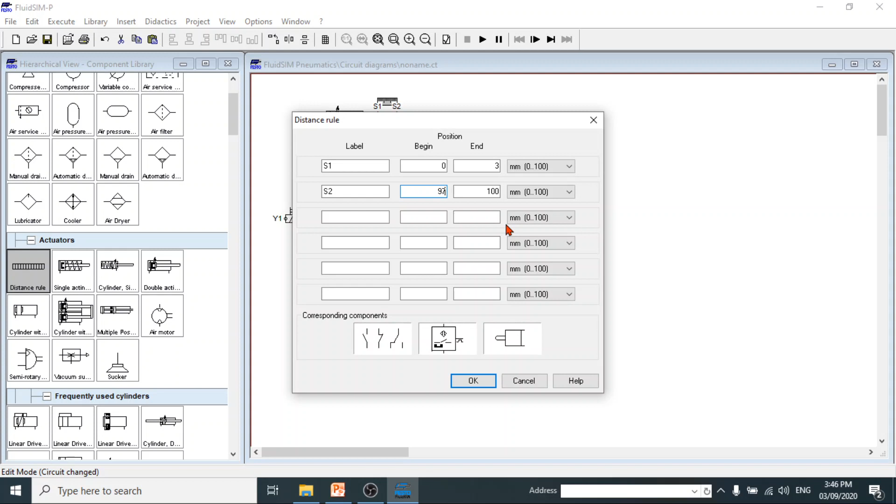So the most important part in the distance rule is that the beginning must be 0, and then the end part of S2, or the extended position sensor, must be the full length that the piston rod can reach. Okay, so that would be for sensor 1 and sensor 2.

Okay, so in this example, we'll be using the application of a pneumatic jackhammer. So we'll try to create a control circuit wherein this cylinder will automatically extend and retract and extend and retract until it is turned off. Okay, so we'll try to make use of the concept of proximity switches to create a pneumatic jackhammer. We'll be using the NEMA configuration, and then we'll also try to use the IEC configuration for your reference.

So by the way, proximity switches. Okay, so the limit switch or the reed switch are normally open switches. That means initially they are open. Okay, so once they detect the position of a pneumatic cylinder, then that would be the time it will close. For example, sensor 1 is open, but since it detects that the pneumatic cylinder is in fully retracted position, it closes. So sensor 2 is also open.

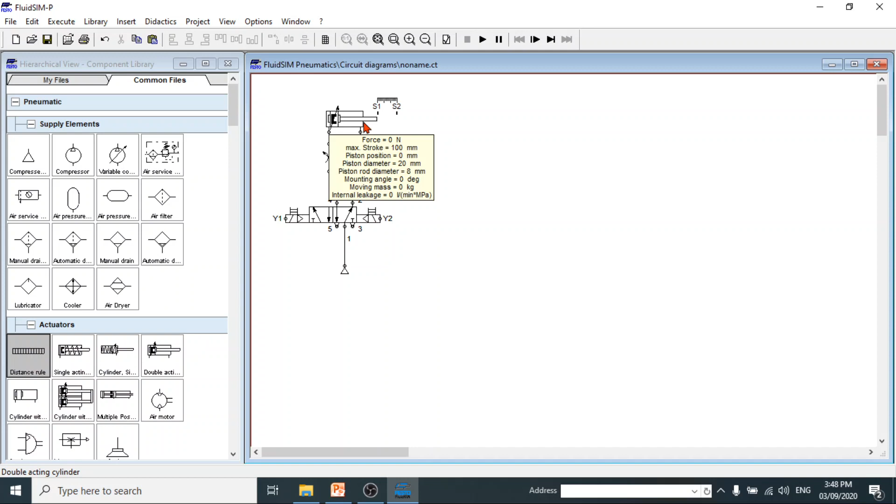So when the cylinder reaches the fully extended position, sensor 2 detects that the cylinder is in extended position, thereby sensor 2 closes its contact. But initially, these sensors are normally open. Okay, so let's try to create the so-called jackhammer. Okay, setup of pneumatic cylinder.

Okay, so we begin with the NEMA configuration. For NEMA, first we need to have the positive terminal and then the negative terminal. Then we have the push button, a normally open push button. We can have it here, and that will be start. And then you can adjust it here, and then the solenoid.

Okay, so take note. This should be Y1. Then it will be connected to the negative terminal. You can adjust it. And then we connect the start push button to Y1, and then we connect it to the positive terminal. So we can start by simulating first.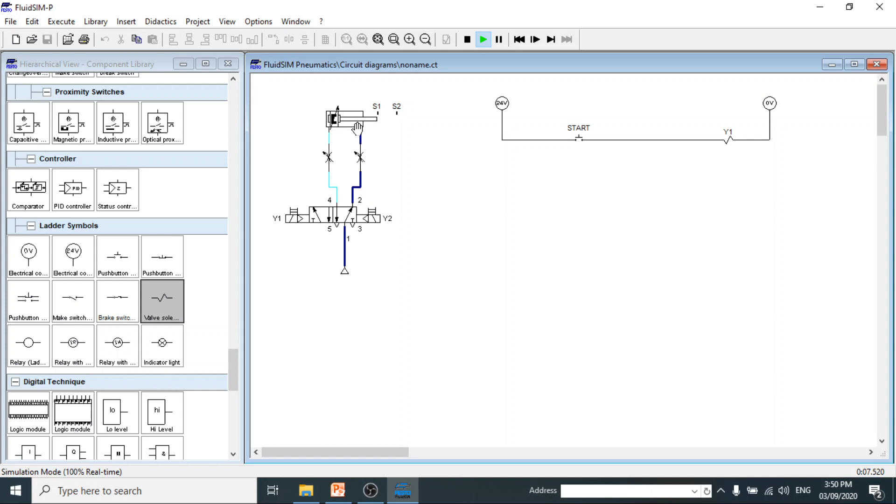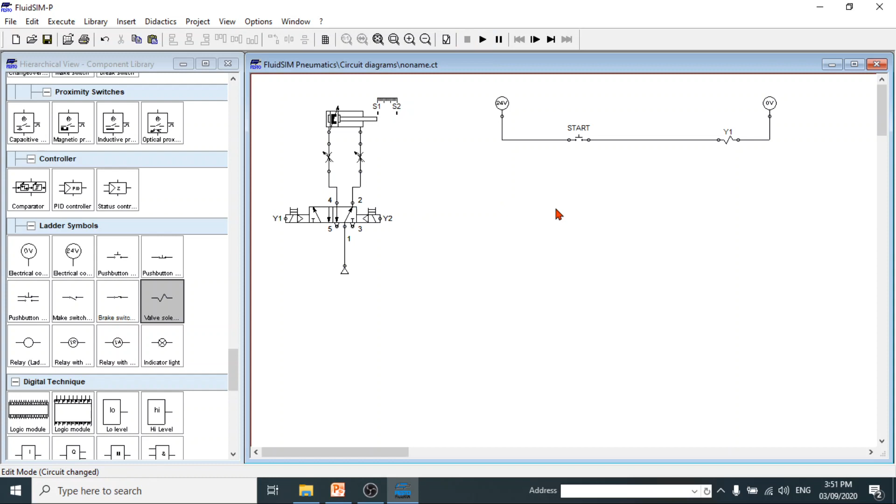Okay, so if we run the cylinder, if you notice, we can adjust the speed. We can make it 40% for example, and this one is also 40%. So we can simulate it again. In the jackhammer process, the cylinder must extend and then retract and then extend and retract. So now the cylinder is in extended position. The next step is to make the cylinder retract automatically.

Automatically means that the sensor, once it detects that the cylinder is in fully extended position, will give a signal for the control circuit to automatically retract the double acting cylinder. And since we're using a 5/2-way double solenoid valve, the only way to make this cylinder retract to its original position is to energize Y2. But before Y2 will be energized, the system must be able to detect first that the cylinder is in fully extended position.

Question: who will detect that the cylinder is in its fully extended position? The answer is S2. Once the cylinder is in extended position, it is S2 that will detect. Okay, so we can stop the simulation first. We can click this one, make switch. And then this would be a limit switch, and this will be labeled S2.

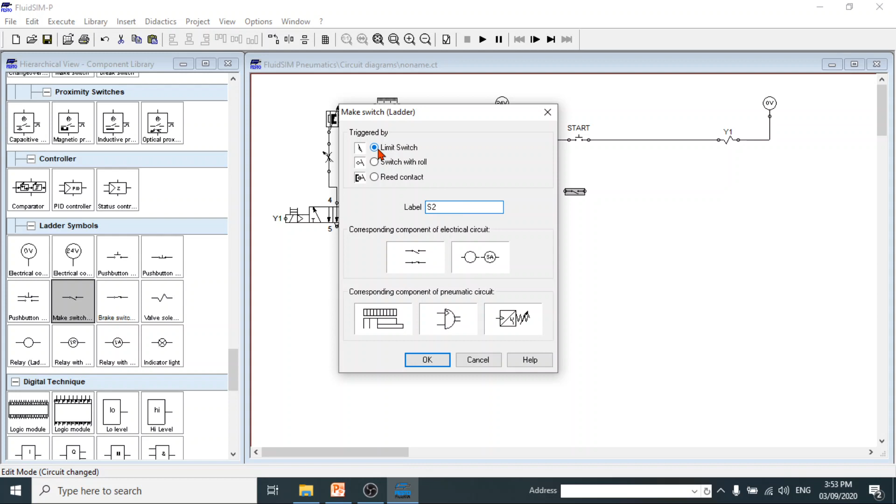Since we're using a limit switch, this will be labeled as S2. And you notice that the symbol for S2 changes. Okay, so a symbol for limit switch. I'll try to zoom in. Okay, so this one. So try to observe what will happen to S2.

Okay, so if we try to simulate, S2 is initially open, right? So again, sensors are normally open, or basically sensors are initially open. But when it detects the position of the cylinder, it becomes closed. Try to look at S2. So if we try to run, the cylinder creates mechanical contact with S2, thereby S2 now closes.

Okay, so on the other hand, if we try to create an open contact and name this one S1, okay, so S1. So automatically S1 closes even though we choose to have an open contact. Why does it close? Because it detects that the cylinder is in retracted position. So try to look at this one. When we try to simulate, try to take a look at S1.

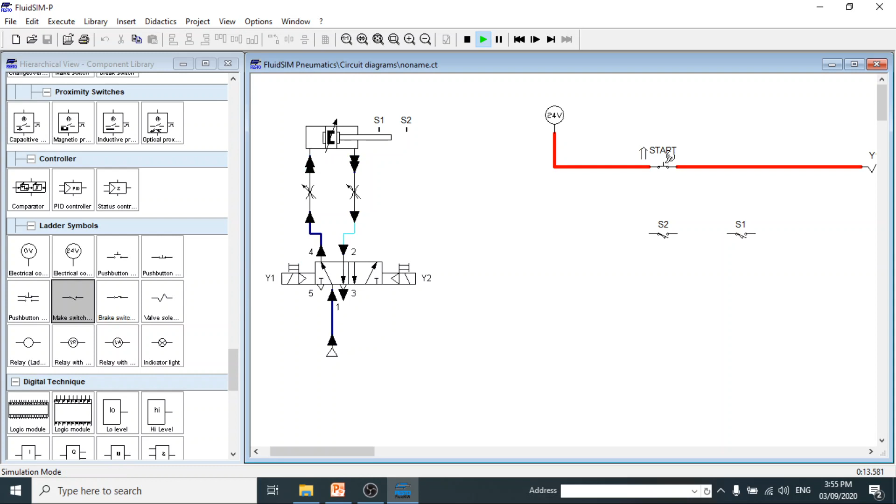When the cylinder leaves this position, it will make S1 open. Okay, so try to take a look. So S2 now becomes closed, S1 now becomes open. So why does S1 become open? Because again, it is initially open. It just closes because it detects the presence of the cylinder in retracted position.

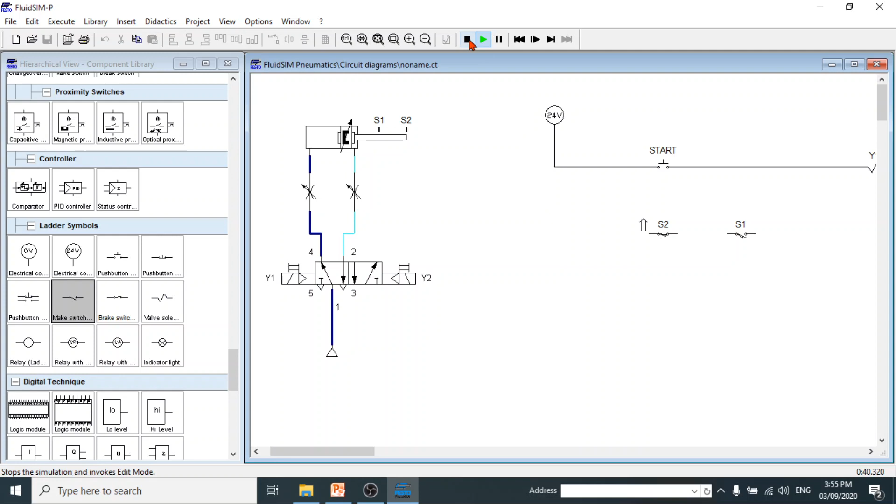Okay, so we'll try to utilize. Okay, so let me zoom in. So now again, the objective is to create a pneumatic jackhammer. When the cylinder extends, the setup must be able to automatically retract the cylinder to its initial position. So how do we do that? We make use of S2 to command the retraction process.

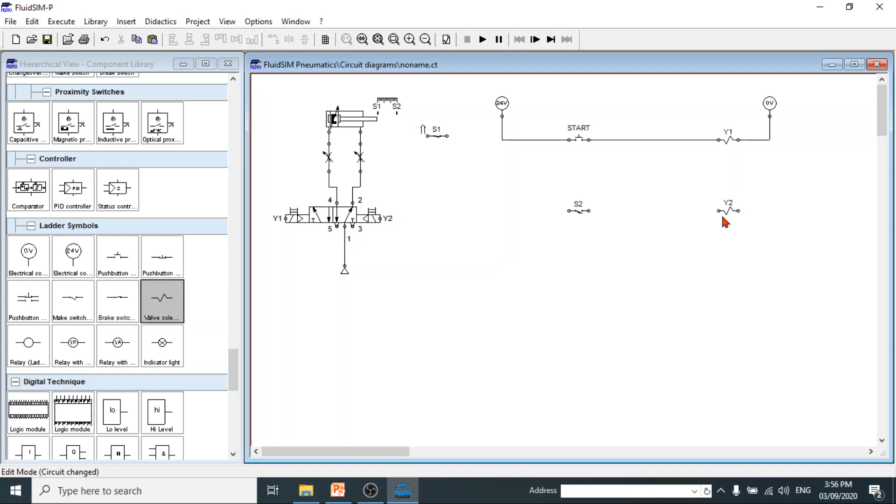Again, the only way that the cylinder can retract is to energize Y2. So we need to have Y2. For example, this would be Y2. Meaning to say, once the cylinder is in fully extended position, S2 will command Y2 to activate. Once Y2 is activated, then it will retract. So again, sensors will be connected in series, and then everything will be connected in parallel, for example.

Okay, so try to take a look at this example. We try to simulate again. We can make it 5%. Okay, so 5% also. If we click start, the cylinder moves and then it automatically retracts. Okay, so try to look at the process.

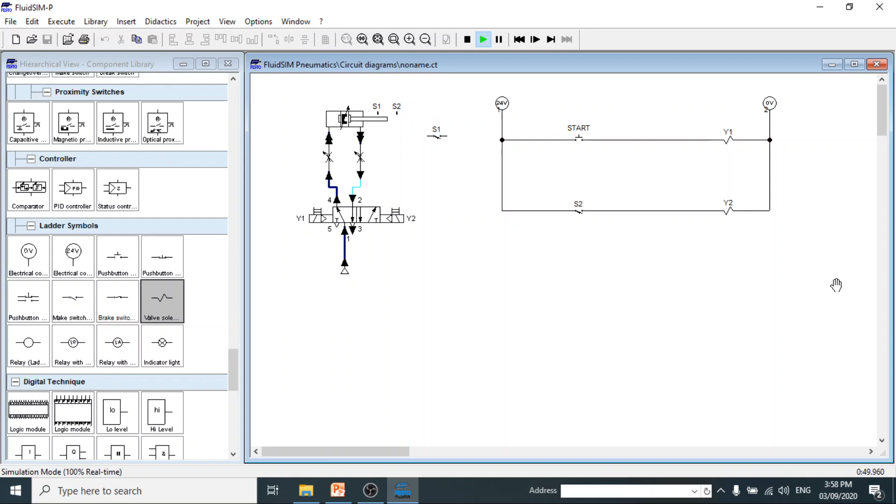Once we click this one, it activates Y1, thereby allowing the cylinder to extend. But when the cylinder is in fully extended position, S2 detects, and S2 automatically energizes Y2, then the cylinder automatically retracts. Okay, so we're not yet finished. We're actually simulating the step-by-step process. Once S2 detects, Y2 now is activated, thereby allowing the cylinder to retract.

After this process, since we want to have a pneumatic jackhammer, we must find a way that after the cylinder has been retracted, it will continue to extend again. So how do we extend the cylinder? Again, to extend the cylinder, the solenoid coil Y1 must be activated. So this time, in the second extension, the activation of Y1 must be made automatic. That means without the use of the push button.

At first, we click the start push button for the cylinder to extend, and then it automatically retracts. The control circuit must be able to extend the cylinder again without the aid of the push button. So we find a way wherein once it detects that the double acting cylinder has already retracted, the sensor will work and automatically extend the cylinder, then repeat the same process, retract and extend, and so on until the operation is stopped by the operator.

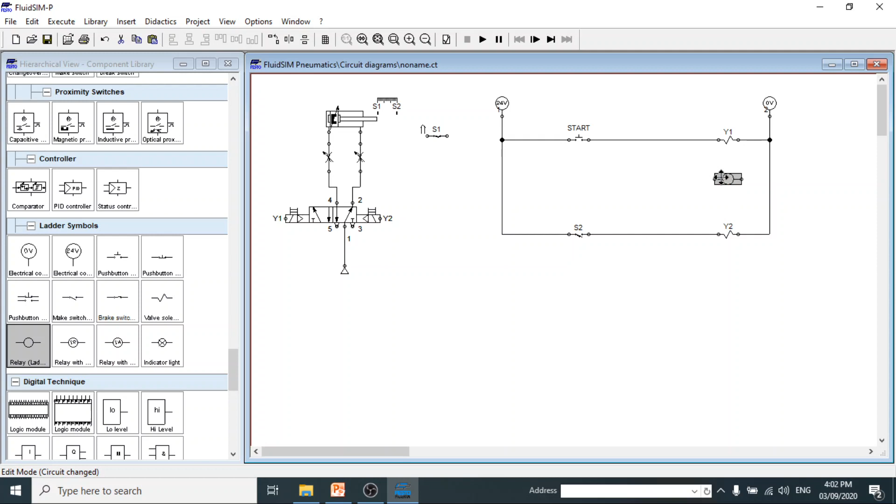So the function of S1 is to let the cylinder extend again. Okay, so meaning to say, we find a way wherein we can activate Y1 automatically, without pressing the start push button. So we can make use of the concept of latching contact. In the latching contact, which is provided by a relay, we can have a relay connected in parallel with the solenoid coil Y1.

So if we connect this one, the function of this relay is to create a seal, wherein even if the start push button is released, this creates permanent contact for the relay to always energize the solenoid Y1. Okay, so we then click make switch.

Okay, so this will be limit switch. And then label this one K1, and of course this must be labeled K1 also. So although the 5/2-way double solenoid valve does not need a sealing contact for the cylinder to extend, we use the concept of sealing contact in order for the cylinder to automatically allow itself to extend again.

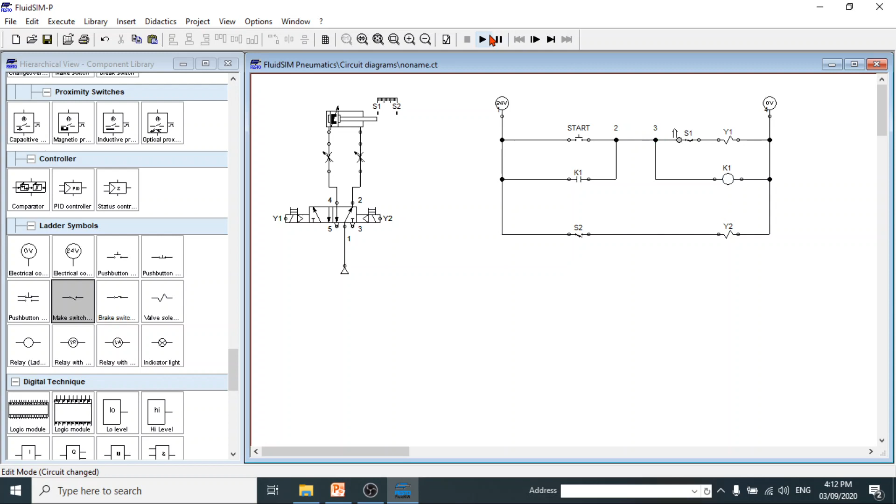So we insert S1 by connecting S1 in series with Y1, and then we will understand what is the importance of the latching contact in this example. Okay, we try to simulate. So before this one, we'll try to have an even smaller opening, 3% for example. Okay, so we try to start.

So you notice S1. Try to observe first the extension of the cylinder. If you look at the circuit, S1 is closed, S2 is open. So when we click start, it activates Y1 together with K1. So K1 provides a seal. That means even if the start push button is released, this allows the circuit in this part here to be always activated.

So again, take a look at what happens to K1. Focus your attention first on this control circuit. When we press, K1 is activated, so it creates a seal. When the cylinder is in retracted position and it extends, S1 opens, thereby de-energizing Y1. Once it is in fully extended position, it closes S2, thereby activating Y2, thereby retracting the cylinder in the process.

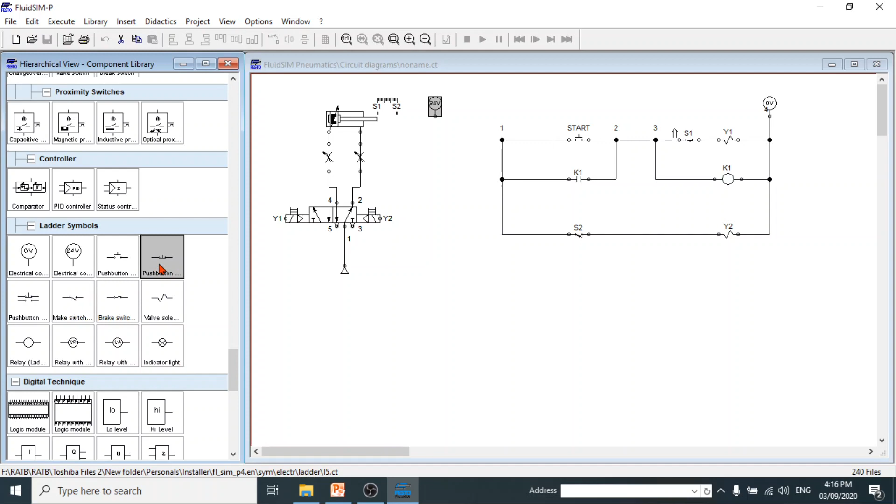So we now have the pneumatic jackhammer. It automatically extends and retracts until the operator stops the operation. So how do we stop the operation? We need to insert a stop button into the circuit. We cut off the supply first, and then we insert a normally closed push button. That would be the stop push button. If we press this one, the entire circuit will be de-energized.

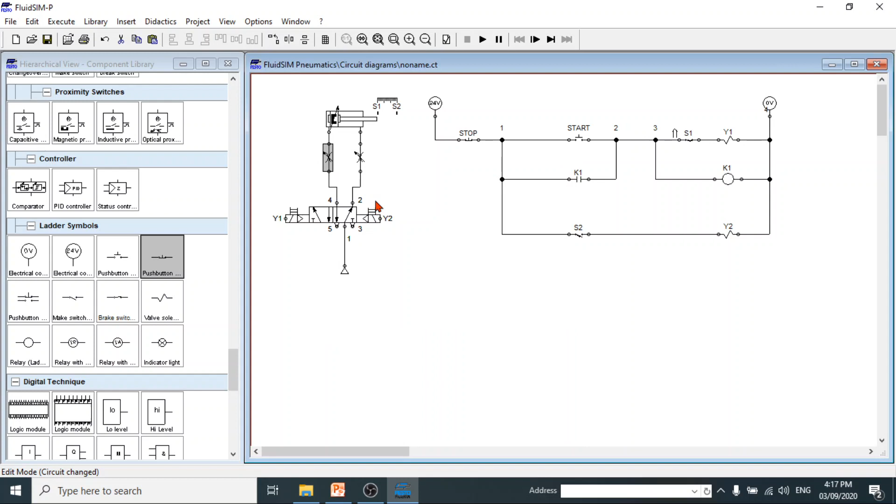So you can stop the process. Okay, we stop it, or start. So the process would stop. We can increase the speed to 40%, and then you can stop anytime. So again, when you press stop, that would be the function of a stop push button. So with this, you are now ready to perform experiments 1 to 6.

You can also try to construct the control circuit using the IEC format. For the IEC format, push buttons come in two types: the spring return push button and the detent switch. The detent switch is actually a non-spring return push button. For example, this one: when you press, this push button will remain closed unless it is pressed again. When it is pressed again, it becomes open.

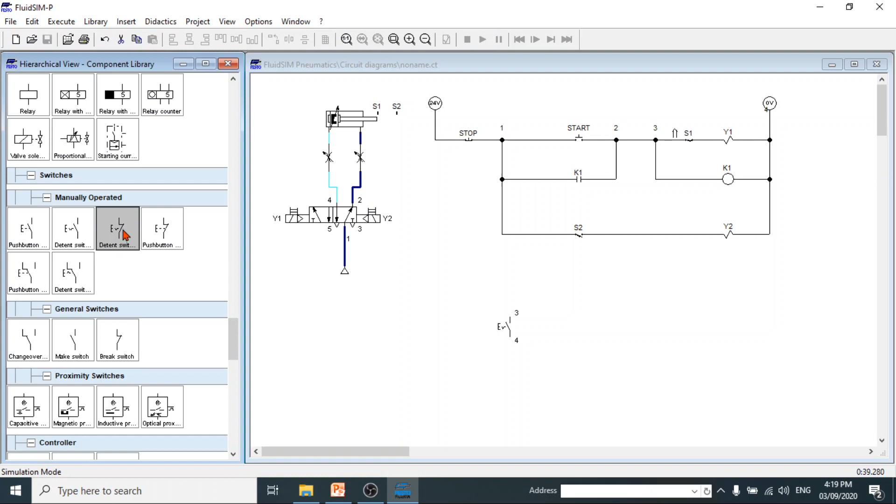So the difference between the push button and the detent switch is that the push button is spring return type, while detent switches are non-spring return type, meaning you need to press it again to become open. Or when you use normally closed, you press that one and it will remain open. You need to press it again to make it close again.

The detent switch is very useful when you have the AND operation, when you are simulating a system wherein you need to click two push buttons at the same time. In the computer, you cannot have two mouse cursors at the same time. So one must be a detent switch and the other must be spring return.